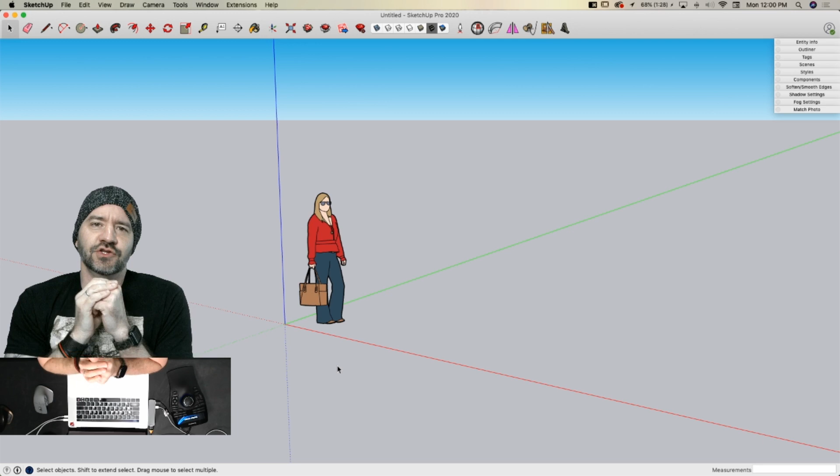Hello everybody, how are you guys doing? Whew, start of another week. Those of us who are US based found out in the last 24 hours or so that we've got at least another month of this, now through April. That was coffee, by the way. Wrong tube, nothing to be concerned about. Excuse me. More coffee ought to fix that problem.

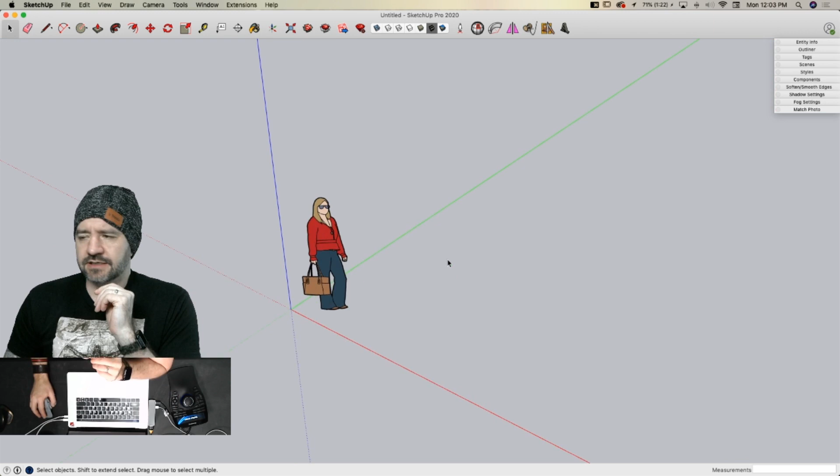All right, should probably get right to it. Yeah, lots of questions. All right, I like it. What's first? Opening with bad hair day.

Kind of. I think what we're doing is entering a bad hair month. Over the week I saw something that said there's a shortage of Flowbees, and I believe it. Not all of us can have Jody's low maintenance hairstyle. Well, actually everybody can, you just might not want it. Not everybody looks good with that hairstyle.

So I spent some time over the weekend inventorying my hat selection. We'll be cycling through a few things here, starting with a recent addition, which is this. Our Trimble beanie, that's what I got.

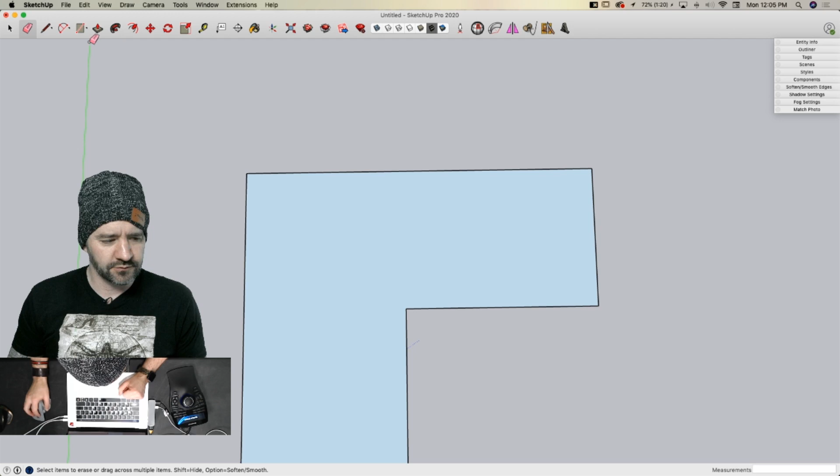What's next? Something SketchUp related, hopefully. Show me how to make radius corners again - apparently you've already shown Richard Larson on YouTube how to do this, and you made it so fast in some video that he had a hassle with it. I can't promise I'll be any slower, I'm on like my 4th cup of coffee.

There are a couple different ways to do it. This is going to be the easiest. Let me make some changes here first - I want a 9 inch radius corner. If I have a perfect 90 degree angle like this, it's pretty simple to come in and say 9 inches, enter. Then I can grab an arc and go to that 9-inch point, pull it across so it turns magenta, double click, and there we go, 90 degrees. Super easy on 90-degree angles.

But to save yourself time, one option is I could just come over here and draw my magenta without looking at the length at all. Then I can select that arc, go to Entity Info, and force the radius up to 9 inches. That's an option too, and it's easier for something like this corner down here. I'll just put that in, then select it and force it up to 9.

Much easier, and it works on inside corners too. All that's really important here is that you get that magenta - it snaps to the magenta, which is tangent to both ends. Once you place it, you can come back, select it, and change it to whatever you want. Say I want this bigger, like 12, I can do that. So that's the easiest way - get it in there first, then go back and select it.

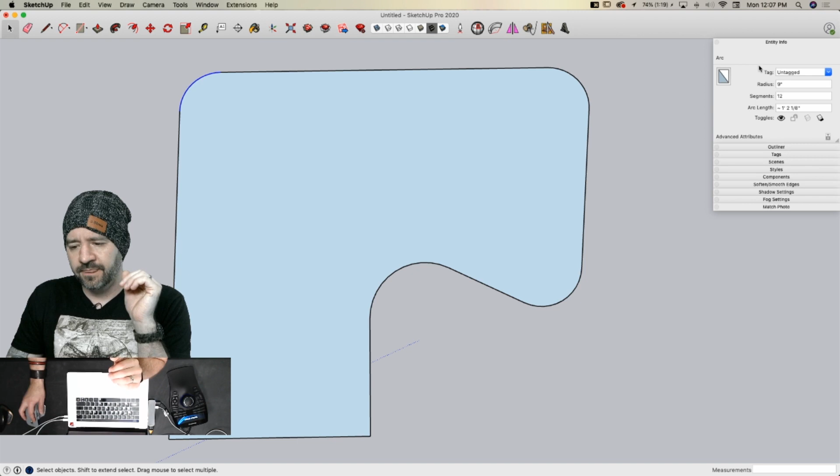Now this only works as long as this isn't broken. If anything causes this curve to explode into segments, I can no longer come in and change the radius because it's not an arc anymore. So as long as it stays one solid piece, an arc, I can come back whenever and change that radius, as long as it stays like this in 2D.

The second I do this, just to show - oh, never mind, it works perfect. Whoa, wait, I think I just learned a new hack. I didn't think that used to work. I don't know, sages, help me out - did I learn something, has something changed? I thought that couldn't happen, but look, it works perfect. That's kind of awesome actually. Whether you teach or not, I learned something new.

You guys may be seeing this in a Skill Builder in the not too distant future. Awesome. So there you go.

There's a couple questions here in the same spirit of something we couldn't get into well here. First one is how do you get a door in SketchUp - that's a 3D Warehouse question. The second is about a slow computer, wanting advice on speeding it up. Both of those - first one is search the 3D Warehouse, and the second is ask on the forum. But you can elaborate if you want. No, I think that's great.

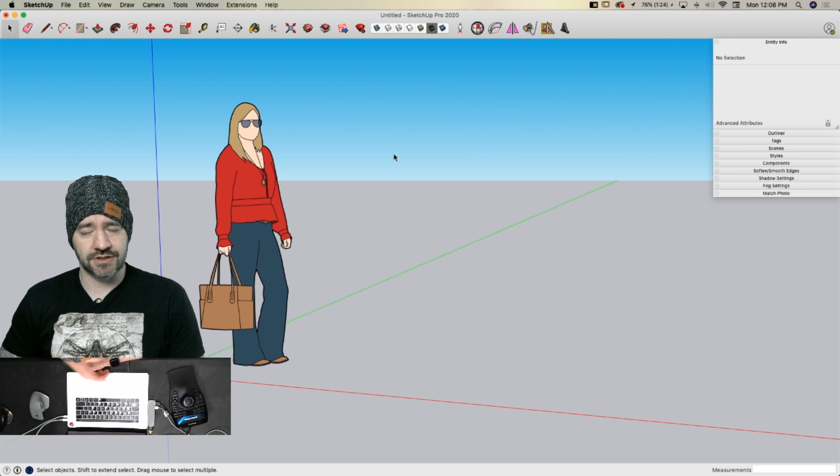For doors, I would start on the 3D warehouse, download them, modify them as you need, and then put them in. If you want to build them from scratch, go for it, save them as components. Once you put it into your model, it gets saved over here as a component, and then you can drag it in anytime in the future.

Just grab it and bring it in. But 3D warehouse is a great spot to start with for anything that's going to be a repeat use in your model. Import that as a component and use it over and over again. Just to expand upon what Jody said, the Sages on there can actually point you towards the old Sage site where they had, what was it called, like the clean modeling guidelines, or something like that. There are a lot of things to do. One is to use components. Components that are reused will eventually take up less space in your model than groups that are reused.

A big one is to come up here to your model info under statistics, and this button right here, purge unused. Every time you import a component, whether it's from the 3D warehouse or from your own computer, you bring it into your model. When you look at it, like so, if I do this, I'll go to 3D warehouse.

And I'm going to go look for a couch, and I'm going to grab this couch right here. I'm just going to download it right into my model. All right, there we go. Whoa, I don't like that couch, it's a big couch. So I get rid of that couch.

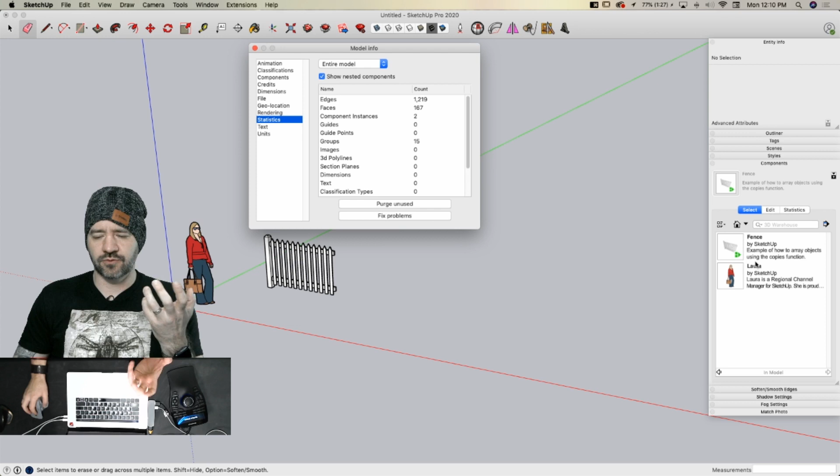And watch what happens over there with my couch. It disappears. Purge Unused gets rid of anything you've got: empty scenes, empty tags, unused styles, components that aren't used. Anything that is not currently in your model will get thrown out. So that's a big one, because a lot of people don't realize that, and they just put more and more stuff in. I've even seen people who have templates.

Nothing's on the screen, but they have like 100 components loaded because they hit Save Template after going through a bunch of stuff from the warehouse. So that's a big one, make sure you purge your model, get rid of all that extra junk.

Okay, Dennis on Facebook wants to know if there's a way to draw walls with an offset. There are several ways to draw walls, and unfortunately there's not one way to do it. It really all comes down to what you want to do. Generally speaking, if I'm going to go in and draw a house, I'm going to draw a quick outline of what the footprint of my house looks like. Say I have something like this.

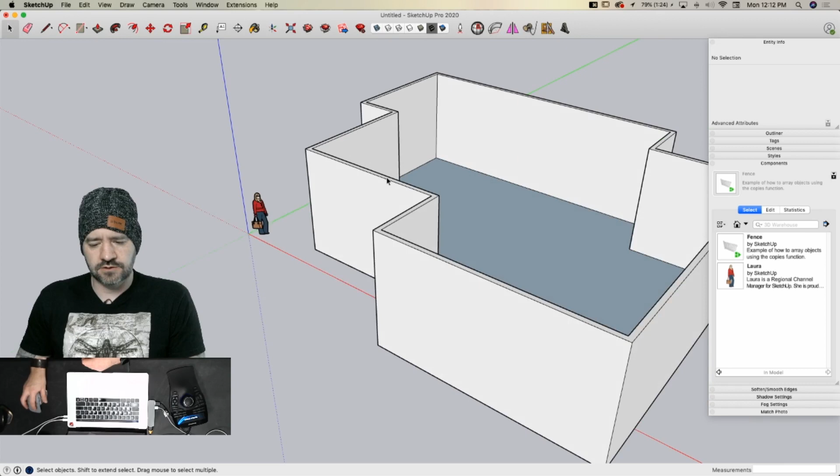All right, so that's my external dimensions. So what I would generally do is get that in first, then I would grab my lines and do an offset of 6 inches, 5.5 inches, depending if you're looking for your frame width or your finish width, whatever that is, and then pull this up in 3D space to whatever my wall height is. Then grab all of these and make those into a group, and then I'd maybe tag those with something like exterior walls.

What this is going to do is allow me to toggle on and off my exterior walls. This doesn't work if I want to get a report on each individual wall, or if I want to actually see about fabricating wall panels or something like that, because this is just going to give me all my walls in one thing. This is how I would probably go about it.

Interior walls gets to be a little bit different. So one of the things I would do with interior walls as I work through here, I would probably pull them out maybe one at a time. They would come out in smaller pieces, that kind of thing.

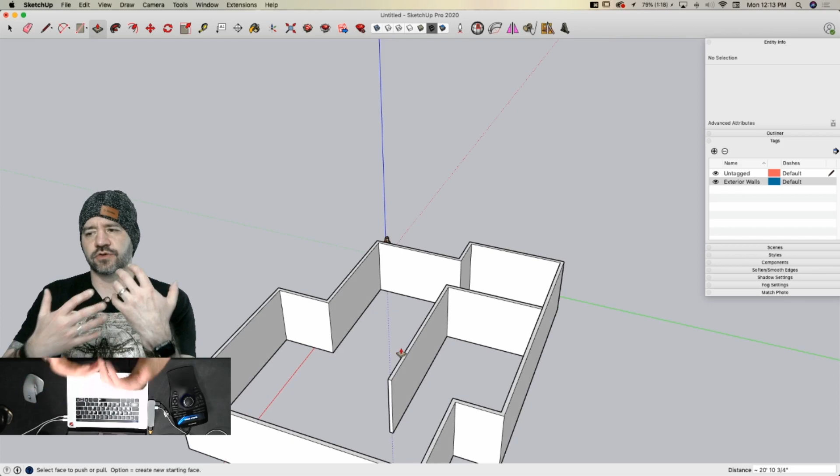I guess I'm kind of tap dancing a little bit because I'm not 100% sure what it means to build walls with an offset. I'm assuming you're talking about building both sides at the same time, and that could be done like this, like it just showed. If I come in here and break this again, I can pull this geometry. So this is one way to account for that offset, is to pull the 2D shape into 3D space. Another thing to look at is Profile Builder.

Profile Builder is an extension where you set up three-dimensional extruding components. You say here's what a profile of my wall looks like, then pull that line of wall along a reference line. You can draw it in with everything included, like a framed wall with sheathing on the outside, a plate, and a footer below, all made up of different pieces, pulled along a single line. Profile Builder 2 is worth looking at if you do a lot of wall work.

I don't know if that exactly answered your question, but I was a little confused about exactly what you were looking for. That's how I interpreted it too.

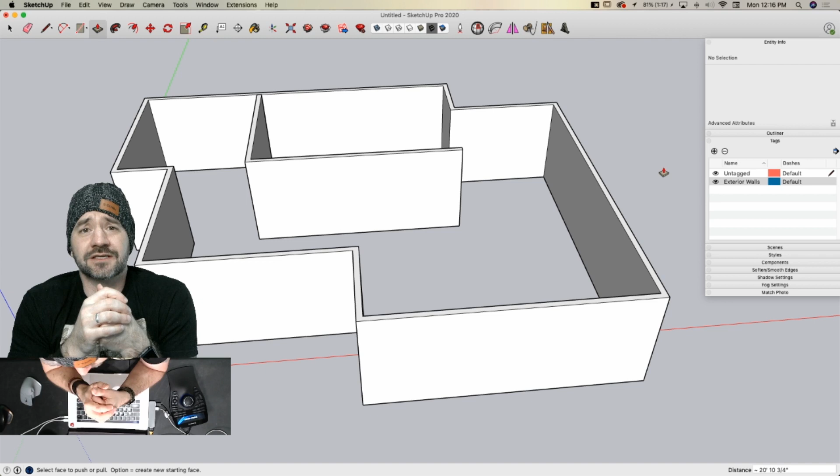So any news on Basecamp? Nothing right now, we're evaluating and trying to figure out our best plan. I want to have an answer one way or the other, but we still don't have it. If Basecamp was in June it'd be easy to make that call, but it's far enough out that we're not sure what will be happening when it comes around. We have a group at Trimble dedicated to figuring out the plan and making it happen, whether now or later. We're still moving forward as if we'll have it in September, but the final plan is still up in the air. I wish I had a better answer. Basecamp is one of my favorite things in the world, and it's a bummer not to know what's going on.

Yeah, I got to sign off now.

Dave Johnson on YouTube wanted to know about Push-Pull losing a face on the back side. He's aware of the control modifier to make a new surface, so he's wondering why sometimes Push-Pull doesn't remember a face. I don't know if I've encountered that, this is one of those things that's hard to duplicate, but I think it might work here.

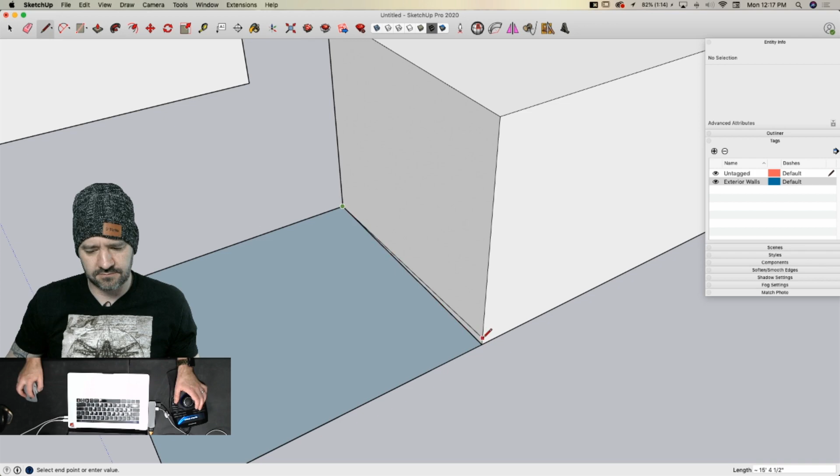If I grab this face and push-pull it up, look what happens on the back side. See that? The face it's creating is being canceled. The reason it does this as I pull this up is it assumes it's going to be joining with this shape over here. So if you have a situation like this, you're not getting a backface because it's assuming it's trying to meld with that other geometry behind. I'm guessing, there are a lot of conditions around this, but I'd guess if you look at your model when that happens, you probably have a plane that exactly coincides with the location of that missing plane.

Or now you don't have a plane. No, you do, at the start of the push-pull. Yeah, okay.

Why do I sometimes get a dashed line that won't snap to tangent?

I need more words. Let me see, do they need to be English words? Do they need to be related to this question? I just need to know what you're doing when you're experiencing that situation. This is the problem with being 10 minutes behind on the questions I'm reading. I'm gonna speed through here. How do you make an arc concave or convex segment between two circles?

Seems to me like kind of doing a radius curve you just did. Yeah, tangents. What I personally do is I end up usually finding 2 points, midpoint to midpoint like this, and then doing that, or snap to endpoints like that. So I know it's not the perfect answer, and I have a feeling if what you're getting at has to do with finding tangent, there's an extension, which I think is called Make Tangent. Dave's on, Dave might know the exact name of TIG's extension for finding tangency.

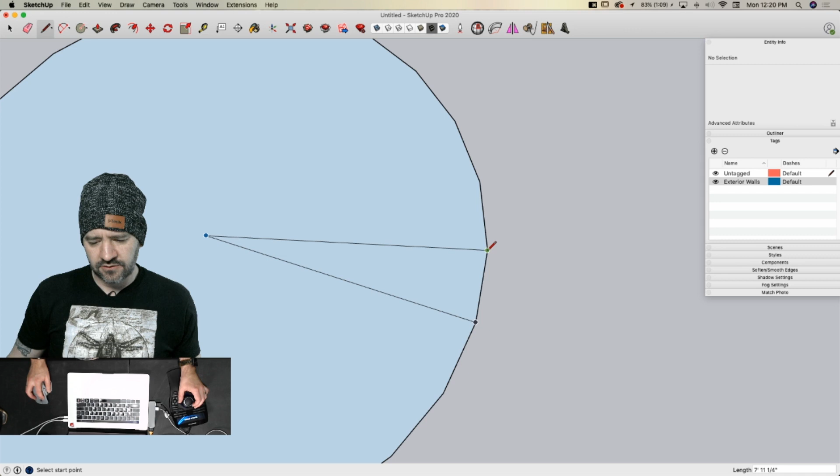When I create a circle with a certain number of sides, this is 24 sides right here. When I create that, these points on that 24 are on the actual radius length. So this length from this point to this point are the exact radius length. But as you can imagine, right here, the radius actually bulges out a little bit. So if the question is about finding tangency between points to create those arcs to make multiple circles go together...

TIG has an extension, I think it's TIG. I don't know, like I said, hopefully Dave chimes in and tells me what I'm missing. There it is, True Tangents. True Tangents from TIG will actually look at the actual location of the circle based on the radius and help you figure out where those pieces meet. So if that's where that question was going, check out the True Tangent extension.

All right, so I'm almost current, I'm only 3 minutes behind. And as I went through all those, there's a lot of questions about rendering. Recommended renderers or good renderers for Mac OS, or what is a way to make my model faster when I'm rendering? Why does SketchUp crash when I'm rendering? Do you have any wisdom you want to throw out there about rendering in general?

Rendering's hard, didn't I put that on the list with politics and religion? Well, some would argue it is a religion. Rendering's tough because first off, people have their own renderer that they like, and telling them their renderer is not the best is like telling them their kid is ugly or something like that. So it's really hard to say what is the best renderer.

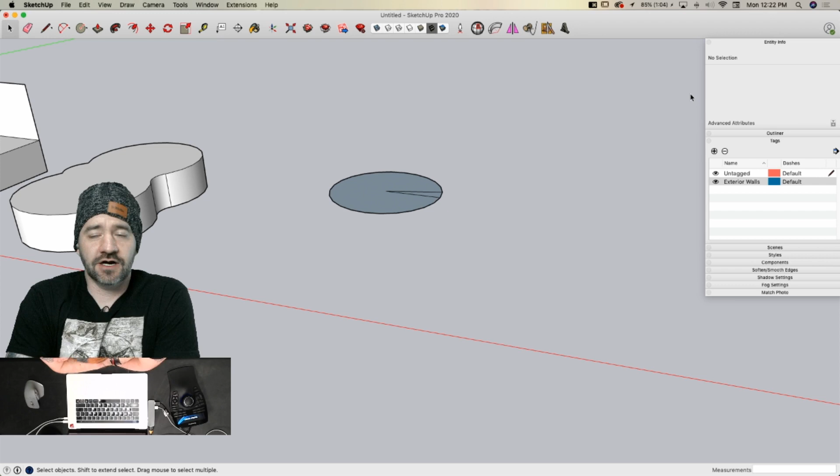So it's hard to say what is the best renderer to use. You can... that's right, that's what I said. Sorry, K. Brooks. So I would say if you know somebody who already uses a renderer and they can show you what they like about it, that's good.

Generally speaking, one of the big pieces with rendering comes down to price. There are renderers out there that you can get for a few hundred dollars. There are renderers out there you can spend thousands of dollars on. So it really depends. If you want to go top of the line, you can look at things like Lumion or V-Ray, but there's cheaper, even free renderers out there like Kerkythea that you can just get your feet wet with. And then there's a bunch of stuff in the middle.

Everybody should use Kerkythea just because then there'll be that many new pronunciations of that word. Oh my gosh, I've tried to use it too. I know there's some people on the forum, and actually some people in the chat today who actually use Kerkythea, which is an old, free renderer. I've never been able to do much with it, it's a little too much.

Sebastian is saying he's used Shader Light, Thea, V-Ray, and Twinmotion. I've not used Shader Light. I've used Thea, V-Ray, and Twinmotion, and they're all good. Is Twinmotion still free right now? That's a good question, because it was.

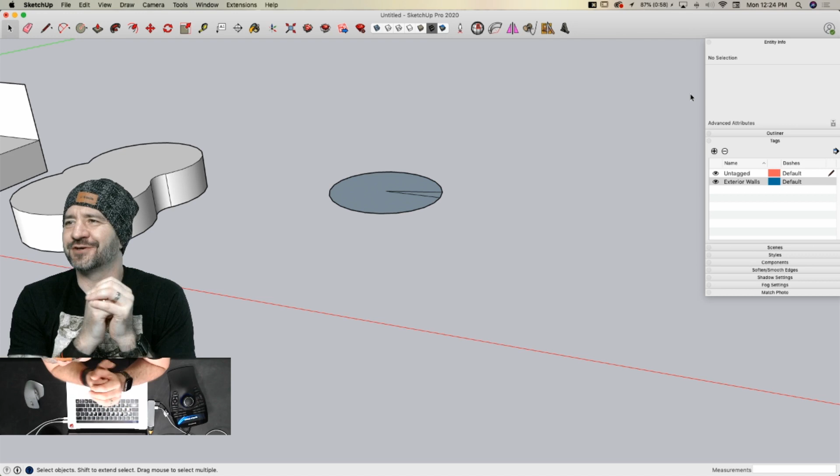So here's one that gets a little more theoretical. Why is there a back face and a front face? Why the distinction? As far as I know, front and back face just goes back forever. That's just kind of the way 3D models have been made, there's an inside and an outside of faces. I don't know how it all works, but it just kind of is the way it works.

There is a difference because a lot of it comes down to rendering too. So if I look at this shape I created earlier, these faces right here are going to be treated like actual physical faces, so the light's going to hit them, they're going to get textured, that sort of thing. These faces right here will be treated either as totally black faces that reflect no light, or possibly as see-through, where they're just not taken into account at all.

Proper faces mean they're going to actually show up correctly. Inside of SketchUp, faces have a lot to do with solids. So if I grab this and triple click and make it into a group, this is not a solid group because it's got a huge hole in it. Whereas if I come through here and get rid of these extra lines, now I have to reverse that face. Now this has become a solid group, so I can use solid tools or that sort of thing on it. It's ready for export for printing. So that's kind of the difference between an inside and outside face.

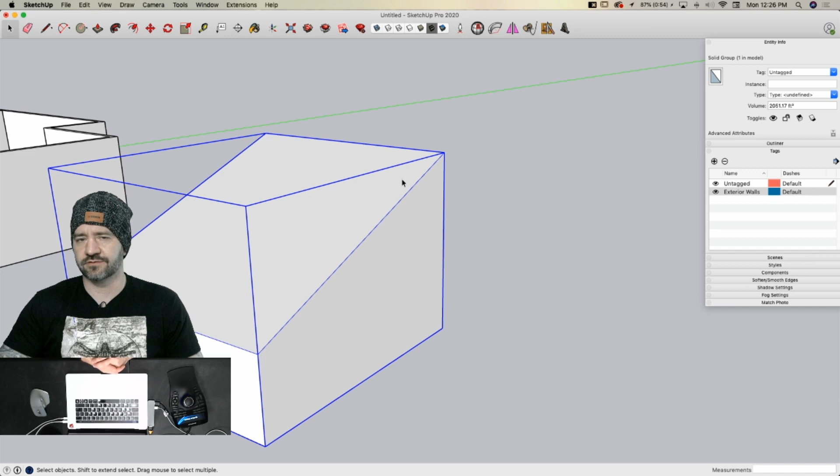As far as why, that almost feels like we're going back to the origins of 3D modeling on the computer potentially. I don't really know why there's been a difference between insides and outsides. As my dad would say, because I said so.

That's the answer, Jody's dad said so. Yeah, my dad's a big 3D modeler.

I do want to hop back real quick because somebody asked a question I wanted to touch on, and that was, why is Follow Me so sensitive? As I was going to say, there's that one, and also someone looking for Follow Me tips and tricks. So here's two Follow Me points I will make right now.

If I want this shape to follow along this line, when you first come in, everybody does this, including myself: you try to do this thing, right? And I have this really clear... whoop, it just jumped, pain in the butt, don't ever do that. What you always want to do with Follow Me is start by selecting the lines you want this shape to follow. Select the lines first, then go to Follow Me, then pick on the surface. Always pre-select, I know you don't have to, it gives you the option of dragging along. I don't know if that was just a thing that looked cool, so that's why it got put in there, but pre-select your path first, because then that jumpiness or sensitivity just goes away.

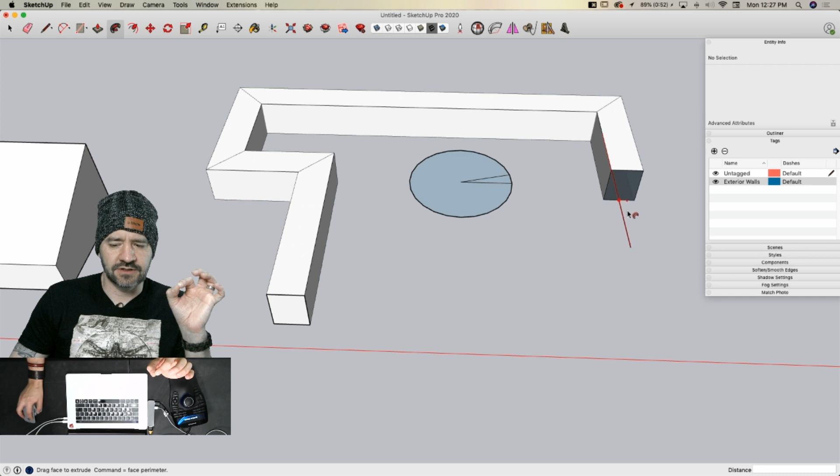As you're moving your mouse along while pulling like this, what it's doing is watching the closeness of the tip of your cursor to any existing geometry. So as I come near different geometry, it's going to start jumping around and doing weird stuff. You don't want to rely on your absolute precision and being within a pixel of the line to have it perfect. Pre-select the surfaces first, or the lines first, then choose the command, then choose the surface. The other thing, this is the biggest tip I can give, is... so I'm going to make that same shape. I want this to follow these lines.

So the first thing I'm going to do is double click this surface and make it its own group. So now it's in a group, right?

I'm not going to go back on what I said before. I'm going to start by pre-selecting my lines and click follow me. But when I come over here, I get the little anti symbol, see, no follow me here. What I can do though is, still inside of follow me, right click, edit group, still inside of follow me, click here, and now I'll go to select and exit the group. What I just created was my new follow me shape, but it's in its own group.

One of the things that can happen with follow me is once it creates all that new geometry - and this is a real simple shape, this only gave me a couple edges - but if I had a real fancy crown molding shape and it immediately joined with all my wall geometry, it can be hard to back up. So grouping it first means my baseboard or wall geometry, or whatever I used to follow around, is now its own group, and I can selectively explode that if I want to, or just keep it separate. So that's my number one tip and trick for follow me.

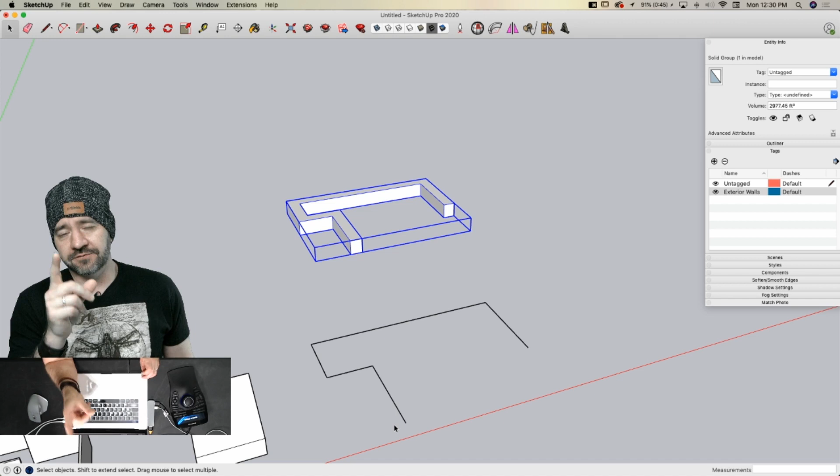Do me a favor: if you have a picture of the kind of chair you want to model, put it on the forum right now in the thread we're working in, because we are always looking for models to do on our Friday live model. So if you have good images we could model from, throw them up there, and we'll do a model on that in the next couple weeks.

If you're going to go about doing furniture, I'd take a look for different tutorials on furniture making. One of the problems people have with getting help on modeling something is they try to get real specific, like a mid-century modern wood chair. Whereas if you said something like, how do I model a wood chair, you might actually find videos of people showing how to make the different pieces.

You might reach out on the forum too. I know one of our sages on here, Dave Richards, is a woodworker, and he's modeled more than one chair in SketchUp, so he'd definitely have tips. I don't want to steal his thunder too much, but I think a lot of it would come down to modeling it in pieces as it would be created, and using components.

So that's my two-part answer: post it and ask for help on the forum. Yeah, it's definitely elaborate enough to warrant an entire 2 to 3 hour session. Yeah, and that would be great. If it has good pictures, that sounds like an awesome model to work on. I know you had two other questions already thrown out there.

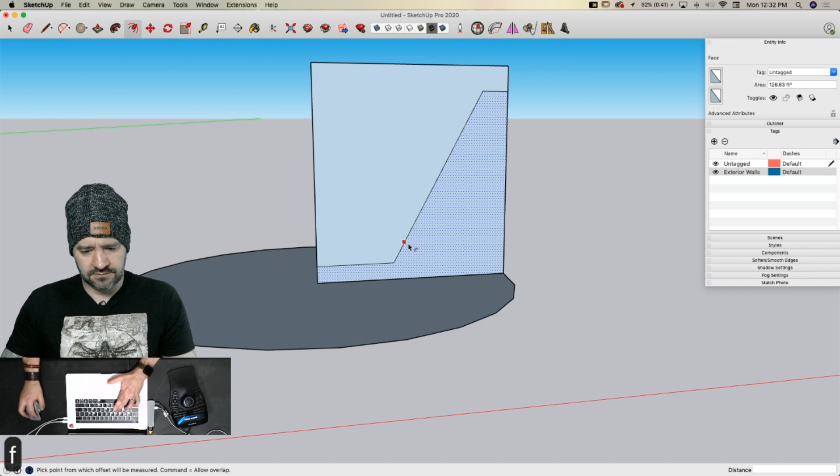Then what I'll do is draw a shape of what my teacup's going to look like here on this piece of material. I'm going to start... let's go like this. I don't want to get rid of that much stuff. Alright, so that's the start of my shape here.

I'm going to grab an arc, put a tangent arc here, tangent arc here, tangent arc here, and then maybe right here we'll do a half circle, maybe something like this - this is not going to be a pretty teacup, it might be made out of styrofoam. Alright, once I have that shape, I can just grab this line, say follow me, click this, and there we go.

This isn't exactly what I was thinking it was going to look like, but it's something. I might have to kick Titus off the channel, he's asking how to model a Mobius torus. I did a Mobius strip once, does that count?

Sure, let's see. I'm just kind of scrolling past the big 3D modeling. Well, then there's one other question, wasn't there? So the last one was making a ramp.

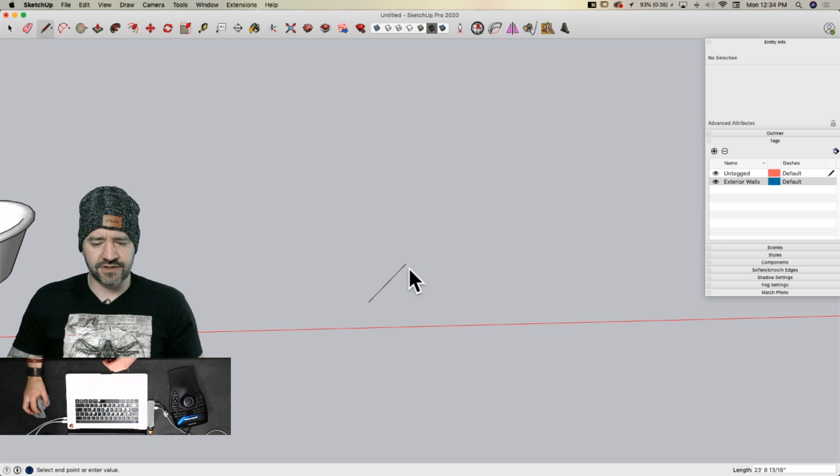So if I want to do a 1/10, I'll come over here and draw a line for 10. 10 what doesn't even matter, let's do 10 feet because it'll be easier to see. And then I'll go up, so on the blue axis, 1, and then draw a line back.

So this top line right here, that is my reference. So once I come over here and I want to draw the ramp, maybe the ramp's like 100 feet long, I can hover over this top line, and then as long as I'm parallel like that, as long as I stay in that purple, I can go 100 feet. There we go.

And that will give me that ramp at the same angle as that. So just draw over whatever your run is by your rise. When that line draws back, that's the line you want to copy or reference as you draw your sloped surface.

So I know there's other parts of that question, but that's the part that I got out of it. Yeah, that's a good part. I think there's maybe, it's also rising one corner slightly more, so the whole thing is a bit off, but I think what you just showed there probably covers a lot of that pretty well.

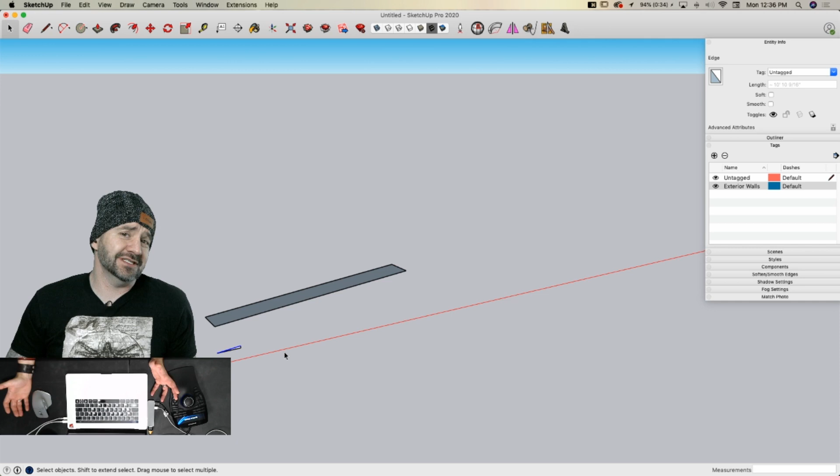So a couple people asking, or maybe the same person asking multiple times, for a Linux version. You want to talk about that? Yeah, though nobody really likes the answer to this. I know that it's something we've talked about or has been talked about. Right now, we have somewhere in the version of 30 to 40 million people using SketchUp between Mac and Windows, and we support 2 different operating systems in development for that. That's a lot of seats.

I know there's a lot of Linux users out there, but this is my personal experience, and this is actually information from when I didn't work at SketchUp, but I remember somebody ran a poll: how much would you be willing to pay for a Linux version? And I think the average came back around $20. So I don't know if that number is still true right now.

And I know our senior product manager is actually a big Linux fan. Well, I think you're omitting, because this is what his stance is on the Linux version: we have a web version largely because it now lets people on Linux be able to use SketchUp, because you can just put it in a browser and use it. That's true, and I think that's probably the extent of what we'll ever see for Linux.

Yeah, the problem is it's just such a big commitment to support an entire operating system. You know, it multiplies out all of production and testing by a whole nother factor, so it's a big deal.

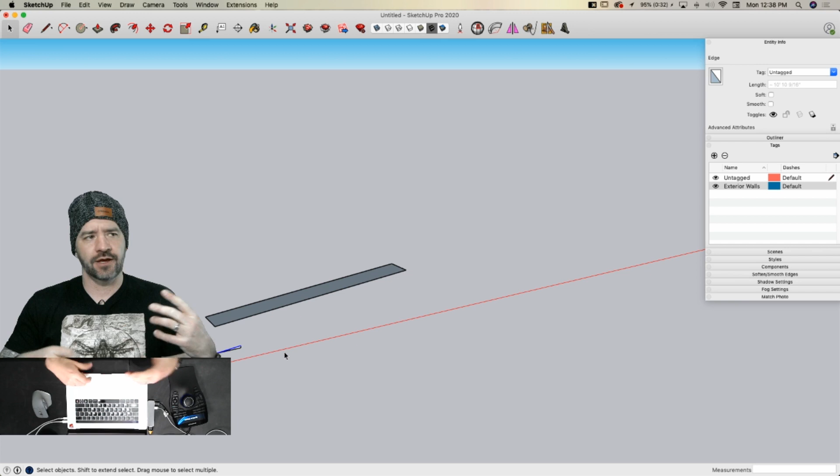So here's what we do right now. We do have a formal learning section. If you go to our website, or if you go to learn.sketchup.com, you can get to our formal tutorials. And we have something like, what is it, like over a dozen hours? Do you know how many hours total is on there, Jody? On Learn, there's 6 classes.

Yeah, I'm gonna say probably close to that. And those are all directed, like each class is an actual process from beginning to end to learn a new concept, which makes them special. Those don't come out regularly, but they're far more produced, they're very accurate, very step by step, very easy to follow. So learn.sketchup.com is one great place to do that. The other spot to get tutorials is our YouTube channel. I happen to know that we have around 850 videos available through that.

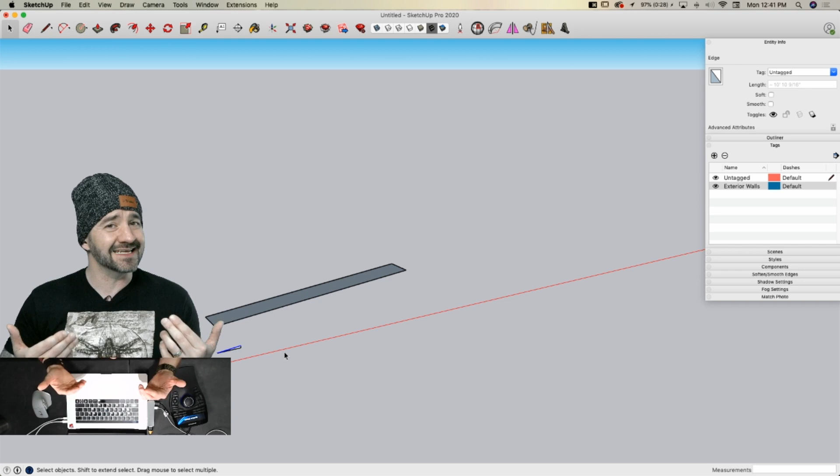We have plenty of users who use both Rhino and SketchUp. So if you need both, you need both. If you want to justify just one of them, then it's really what's going to work best for you in the workflow that you need it for. I'm an advocate for SketchUp, and I have been since before I worked here, because I like the simplicity, the usability, the learnability of SketchUp. So I will always push people to try SketchUp, push SketchUp to its limits, to do as much as you can in it. But if there's something in Rhino that you absolutely need to get your work done, then that's something else to weigh in as you try to figure out what the best software is for you and your workflow.

All right, so let's get back into SketchUp. Blake wants to know what's the best way to deal with section cuts inside of scenes, i.e. each scene has a different cut.

When you look at scenes, active section planes is part of it. So let's find a 3D thing. All right, so here we go. I'm going to put 2 section planes onto this area right here. Grab one, I'm going to put it right here. I'm going to move that in, and I'm going to save this as my first scene.

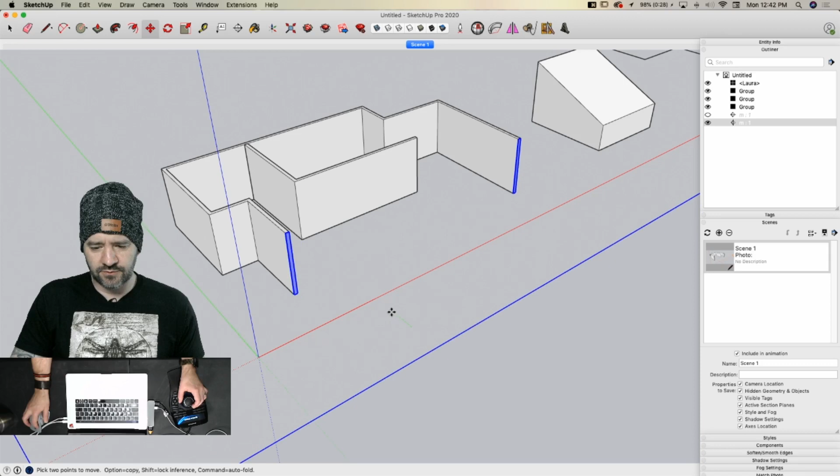All right, now I want to deactivate this section. So I'm going to go to my outliner - it's the easiest way, because I can just right click and say deactivate cut, and I will hide that. It's worth saying now that in 2020, the outliner got a lot better. Gooder.

All right, and now I'm going to grab this one, push it in, and save this as a second scene. And now, when I flip between these two, it's going to switch between the 2 different views. If that's what you're asking about, it's really pretty easy. If you've already got the scene created, you can go in and add the section cut that you want. Just make sure you right click and update your scene after you add that section cut.

Oh my gosh, I'm almost to the bottom. I'm almost to present time.

JD Cam C wants to know how to change the color of a texture in the Mac version, like if you have a white brick texture and you want to make it green. I happen to have the Mac version right here. I'm going to go grab just a stock material. Oh, hey, look, here's brick. All right, so we want to take a white brick, is that what we said? And then we want to make it something different? Yes.

All right, so what I can do is go home. Here's my material that's in this model. This is not part of the library, this is what's in the model right here.

If I double click on it, that's the process, so here's the steps. I have to walk myself through it because I always forget how to do this - not that it's difficult, I just don't do it very often. So you want to go to your home tab, don't do this from the library. I don't want to do it from in here, but from what's in my model, because I'm going to affect what's currently stored inside my model. So I'm going to double click on this, and while it's selected, it'll come up here with this edit material screen down at the bottom.

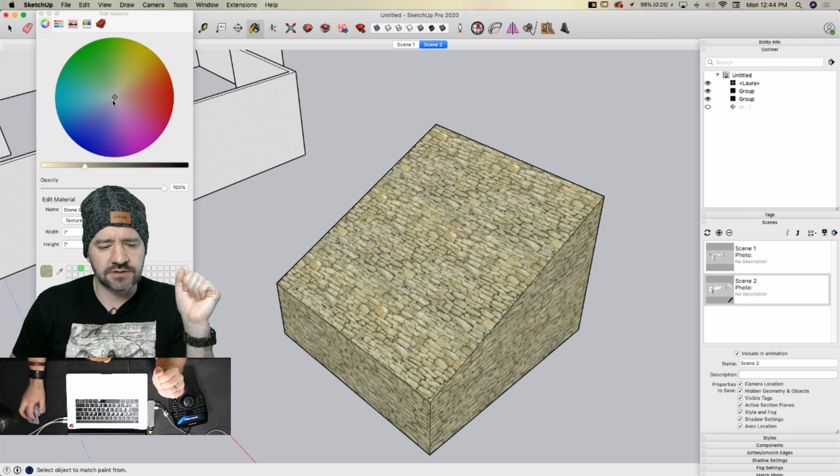Now I want to come over and switch to, in this case, my color compass. As soon as I get that up, I can just drag that however I want to change those colors. So if I want a really crazy green, I can turn that. The thing to remember is you are actually changing the colors stored in this model - so this model doesn't have the tan sandstone thing it had before, now it has crazy green instead. Really pretty simple - double click and adjust the colors, just remember you're changing that.

So the main one, if I come back over here to my bricks, this one's still the same, so I can still grab that and put it back on there. But here, saved in the model - well, now I undid all that. So just something to keep in mind.

So if you had changed the name, would it have kept that and brought the new one as new? Right, so if I come in here, duplicate this, and now I can take this one, adjust it, and now back here I have these two. So if I did want to, I'd come in here, put that on there. So now I have both. That's a good question.

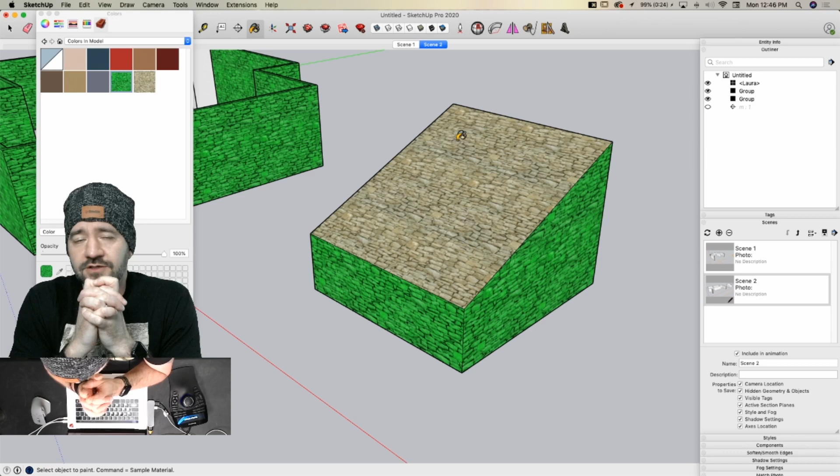Christopher Ryan reminded us of your promise of a hinge. Tomorrow, maybe? Wednesday? Nice, okay. No, tomorrow - it's a skill builder, it may be coming out tomorrow. You upload stuff on Tuesdays. Maybe people don't know that on Tuesdays and Thursdays it's pre-recorded. That's right, so we won't be live on Tuesdays and Thursdays, but there will be a SketchUp video each of those days, so come check it out. Like I said, tomorrow I think is modeling a hinge in just a few moments. I think, if you took all the talking out - some people just talk on videos - it's about a 3-minute process to make a hinge, which is pretty cool.

So someone did follow up on the ramp you were working on before - they want to make it semicircular. Actually, two people - someone else said something similar. What did they say? I lost it. Semicircular - how to create a curved ramp with a slope of 1/8. So two different people wanting to make a curved ramp. So here's what we'll do.

All right, I don't know, I'm gonna try something - hold my beer. All right, let's see how this works. And then I'm gonna pick up this line right here, put it right here. This does seem like this could be an argument for Shape Bender too.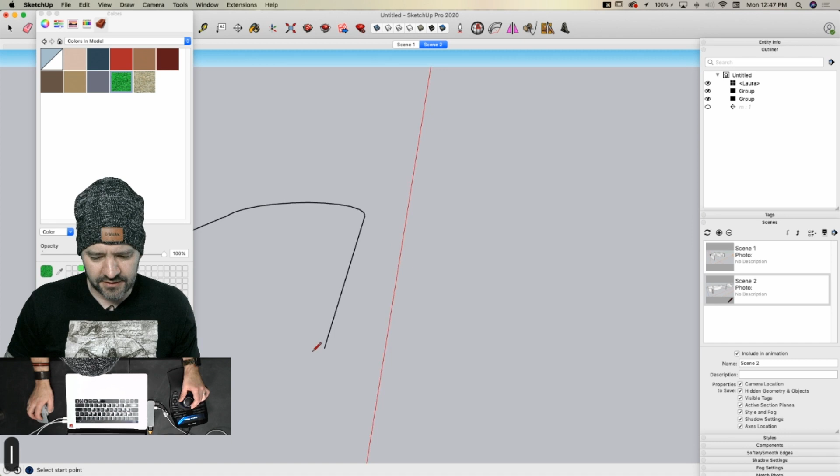There's an extension called Shape Bender available on the Extension Warehouse from a developer named Chris Fullmer that does a great job - yeah, I've heard of him - of just... and they're not simple, what they do is very complex, but very easy to use extensions. He has one called Shape Bender that lets you take one shape and basically tell it to follow a different shape, so you'd have a straight - actually I think I have it.

Maybe we'll try that after this. I'm gonna make this a group, triple click this line, I'm gonna say follow me, edit this group, click on it. So that's a 1-10 ramp. I did not angle this part, but you could have just as easily - I could have taken that arc and actually turned it up at 1-10 also. But something like that, maybe, I don't know.

Okay, I'm catching up here. How can you save components so they'll be available in a template? You mentioned that at the beginning. Sure, and same thing with materials. So, how do you create templates with it?

A template file is just a SketchUp file. There's nothing special about it. Some places have extra files that are template files versus regular working files, but template files are just SketchUp files that SketchUp opens at the beginning. Instead of having an empty screen, you have the contents of that SketchUp file.

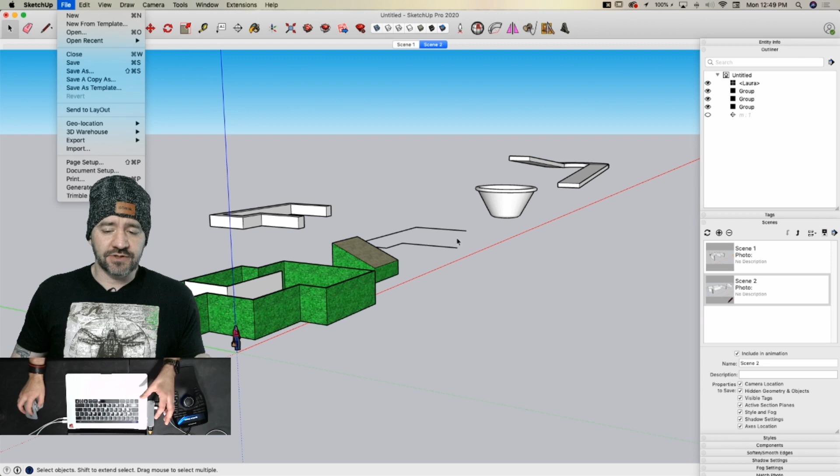You can create one at any time by just going to File, Save as Template. So right now, if I hit Save as Template and save this, when I open it up, all this stuff will be on my screen. Anything else I've set up will be in there too, so my material will be in there, any components I've created will be in there, so my fence will be right in there.

Well, let's go ahead and do it. Let's go File, Save as Template. And I'm going to call this Delete Me. That's going to be the name of my file. I don't want to make it my default template, I'm going to go ahead and save it.

Now if I go to File, New from Template, which one do I want? These are all my standard templates, but over here we have a tab called My Templates. If I click on that, here's my Delete Me template. So if I open that, brand new drawing, everything that I had before is in there. Here's my fence, here's all my stuff on my screen.

So if you think about it as just being that, a template is just a SketchUp drawing that it's going to open when you start, it's really pretty simple to figure out how to do that. So there you go, that's pretty easy.

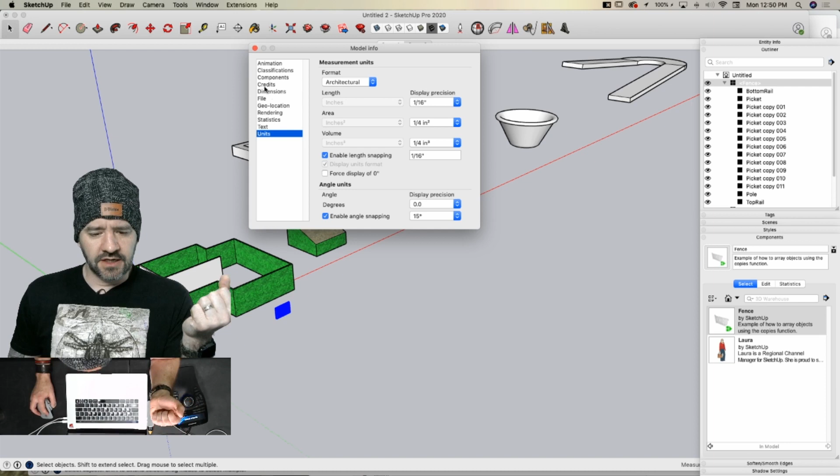It's probably worth mentioning that under the Window menu, when you go to Model Info, all of that stuff is model specific information, so any changes you make in there will also be saved. My units, any of the information that's in here is also going to be in there. So if you do a lot of models, you upload to 3D Warehouse, you come in here and fill out your credits information, that's going to be information in there also.

So yeah, all that info is automatically saved, including your style. What does my style look like? Do I want it to always show up like this when I start a new model? All part of that template SKP file. Good question.

Okay, so this one's been asked a couple of times. Can you pull a blueprint into SketchUp and then draw over the top and create a 3D model? Yes. He's asked this a couple times, and I'm not sure if he's asking if you will do that now or if it is possible to do. I don't know that I have any files that I can show to import right now.

And due to the sensitive nature of some of the stuff I work on, I am not going to root around through all my files right now, it's a good way to get in trouble. But what you can do is when you go to File, Import, which we can do.

So when I come in here, I have the ability, oh shoot, I forgot, the new version of SketchUp doesn't give you the drop down because it just opens the files. But you have the import or ability to bring in a DXF or a DWG file. If you're on Mac, you can import a PDF file. You can also import a GIF or a JPEG file, or any of those graphic file types.

And when you import them, if they're 2D, they'll just lay down on the ground inside of a group. Then it's super easy to go in and either make faces directly from that geometry or use it as a reference to trace. If you go to our YouTube channel and look for import DWG, import DXF, or import CAD, there's a series of 2 or 3 videos that Tyson made a few years back showing the process where he actually creates a floor layout from DWG drawings. So yeah, very easy, a lot of people use SketchUp in that way.

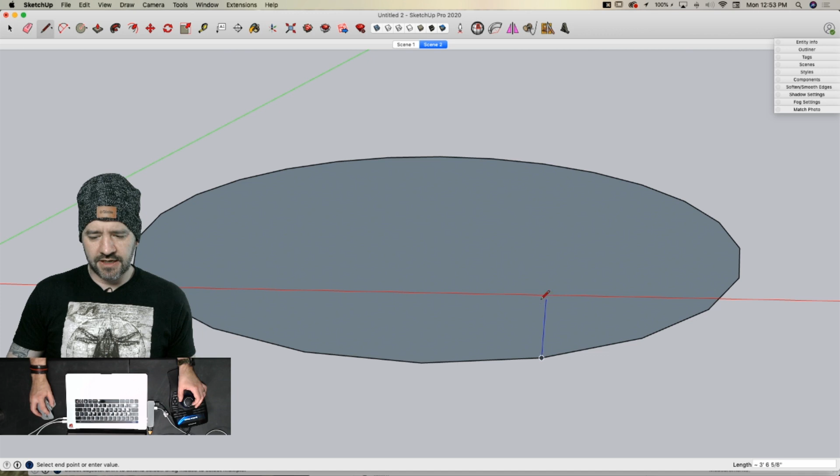So this would be my one to ten.

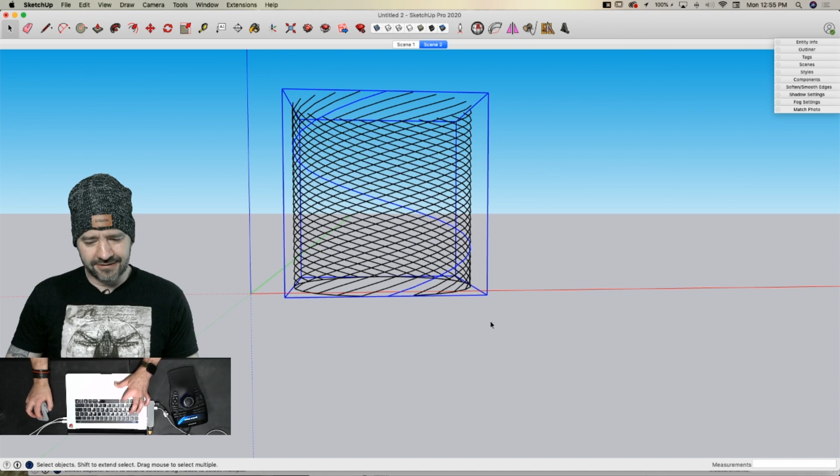Now I'm going to get rid of this circle. I'm going to triple click on one of these, and now say make that into a group. Now I'm going to grab everything - oops, control Z, sorry, make group. Now I'm going to grab everything except that group and delete it. Now I have my shape.

Now what I can do is come in here, create my ramp geometry, grab that, follow me, grab my ramp. Whoa, that's an extreme ramp. You have to really build up speed before you start going up it. All right, let's try that again.

I think this needs to be 90 degrees perpendicular to the... yeah, sorry, maybe this will work. Let's see, no, obviously I need to know - I grab that, follow me. Nah, still gonna do it. So that's exciting, what you'd want to do - I'm just excited about this shape, this is kind of cool.

I'm going to soften this. All right, it's extreme, you really have to get going - yeah, you have a lot of speed by the time you hit up here.

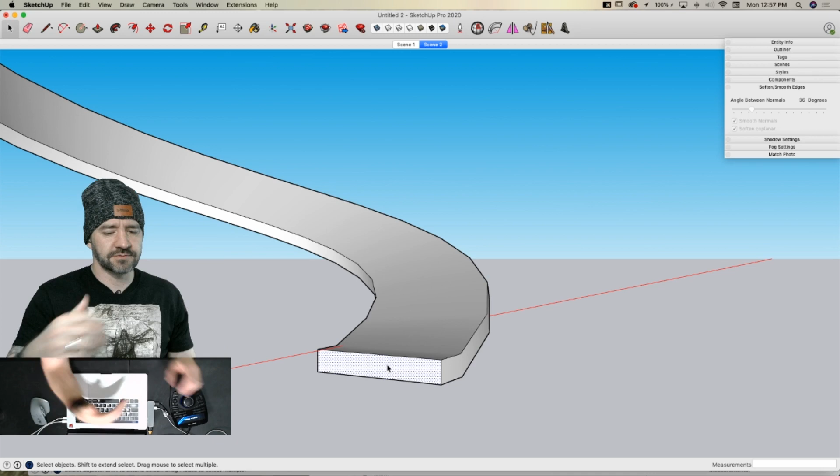There's an extension from Eneroth called Upright Extruder. What happens with the standard follow me is it keeps the geometry perpendicular to the path it's following. So if it's perfectly flat, like for most uses, it works perfectly fine, or if you're going around a circle, it works fine. But when you start to get stuff that curves like this, it starts to grab that shape, and in an effort to stay perpendicular to the path, it starts to rotate. Eneroth's Upright Extruder keeps the shape flat, vertical like that, all the way up. So that would keep it flat all the way up as it follows that arc.

So yes, I thought I could just wing it and make that work, but you will need Eneroth's extension to make that work. It's fun to watch anyway. Yeah, I like the shape I created - I'm going to keep this on the screen until something better comes along. That was a challenge.

So Caden Wilson on YouTube said when he imports AutoCAD files, it's hard to extrude them. We can talk about that, or also talk about the existing YouTube videos if you want. Yes, both.

One of the issues that comes up with grabbing AutoCAD files is a lot of times they don't create surfaces. So if I just have a series of lines, if my drawing comes in with this shape but there's not a surface there, I can't push pull that. So that means you have to come in and either draw a line to close faces and then push pull them to pull them into 3D space, or there's a couple of extensions out there that you could use.

There's actually a video within the last year or so that I made that talks exactly about this process. There's an extension, I believe - and I'll get corrected if I'm wrong - I think it's called Make Face.

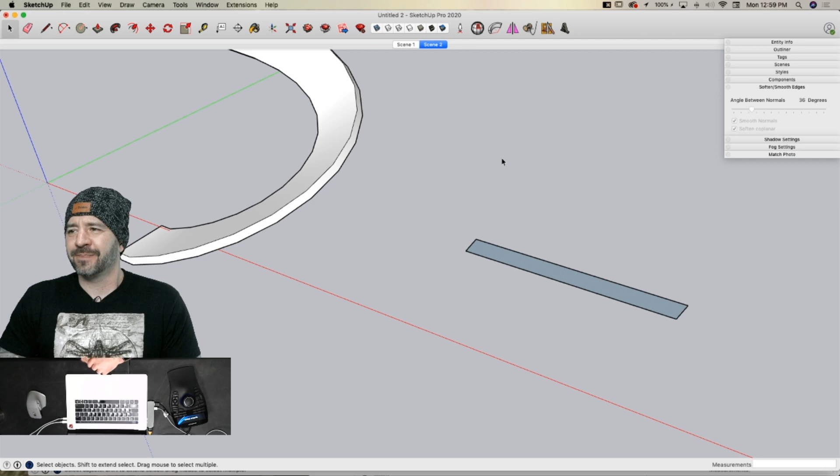I think it's called Make Face. That'll actually take those 2D drawings and run through them and try to force any place it can close to give you this kind of geometry.

One of the things when I used to do design work, if I was bringing something into SketchUp, a lot of times I wouldn't use the exact lines from a DWG drawing. I would keep them locked in a group and trace over top of them with my own lines, so I knew the geometry I was creating was correct. Obviously it's up to you, you do it the way you want. By doing that double check, I negated the issue where sometimes dimensions and drawings didn't line up perfectly, or lines weren't drawn exactly where they're supposed to be. I could do that double check with my own design work over the existing CAD drawing. But it's your call, do what you see as best.

Yep, it is the S4, it's from S4U. It's called Make Face. That's a good extension.

So Jonathan, I think Galliano is his name, wants to know if you could go over making a texture from a picture so that it looks correct. For example, how to make deck boards as a texture.

Yeah, I think Dave just said he sent me something. Oh, you're down at the bottom of the list. Oh, somebody pushed up a mid-century modern chair in the meantime. Hey, I don't see anything from Dave in that thread. Yeah, I think Dave, can you post it? Just drop it into the forum.

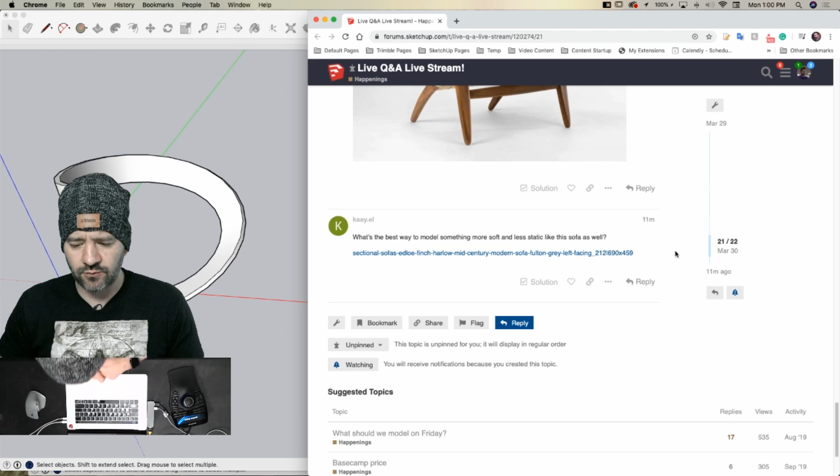Yeah, once Dave throws that wood here, I'll grab it. Well actually, you know what, here's how nutty we're gonna get. Oh it's so crazy, like Nutella.

While you're doing that, you can also answer Cowboy USA's question about using SketchUp through their NVIDIA GPU. How important is that? I'll defer to Jody on that one. Go for it. It's really important.

Well, let me just broach the issue as a whole. The issue with different video card manufacturers comes down to their support of OpenGL 3.0, which is what the newest version of SketchUp uses.

Is NVIDIA the one that does, which one's preferred, Jody? It depends on any given release. It seems like every other release of AMD or NVIDIA cards, there's some sort of wonkiness. Both of them are, for the most part, okay if you're using either. Those are really the two main 3D accelerators. The Intel cards are designed for 2D stuff. So if you have a computer with a built-in NVIDIA or AMD card, you should be making sure you're using that.

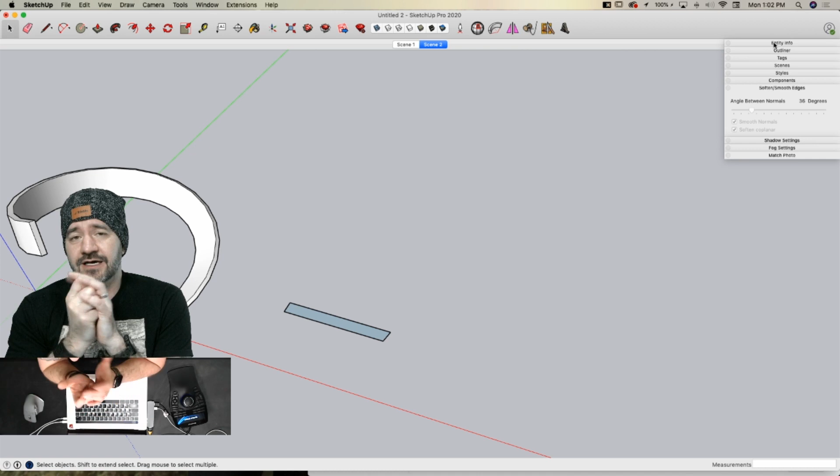The big thing, like I said, is support of OpenGL. So if you're looking at a card and you're not sure, look for OpenGL 3.0 support for the most recent version. That's 19 and 20, I believe, that use 3.0. Make sure it supports that, and the newer cards should work just fine. I've always advised if you basically go back one version, don't buy the bleeding edge thing that just came out, but get the one that came out last year, and you'll get all the benefits without paying the premium. And it's going to be compatible with the latest stuff.

All right, Dave shared one of his wood textures. So I'm going to apply this to a board. I'm going to make something that is 4 feet by 5.5 inches. That was wrong, 4 feet by 5.5, not 0.5, but 5.5. So this is my 2x6 right here, we'll go ahead and make it 1.5 tall.

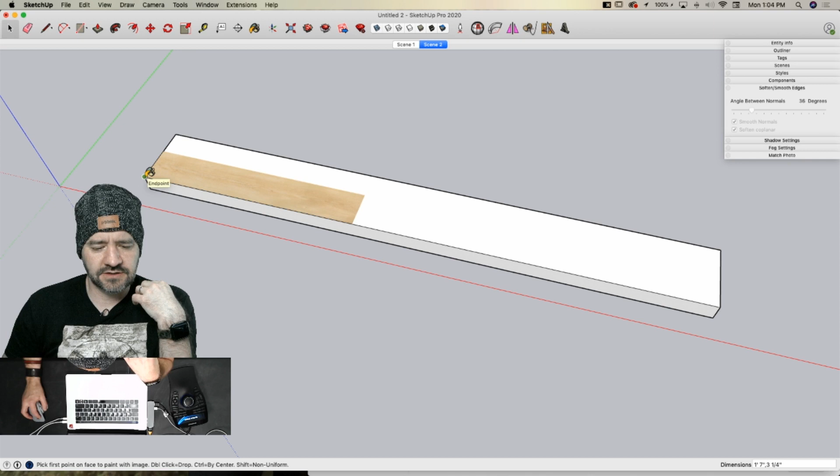So if I want to make this look like solid real wood, I could come up here, say File, Import, and grab this material. Turn my options on, and use it as a texture when I import. This is real important - one thing people trip up on is when they import it, it snaps to a corner or does weird stuff. That probably has to do with your importing usage - what is this going to be used as when you import it? It's going to be a texture, so I'll turn on use as texture, import, and now it's going to ask me to place it. I'll place it by this corner right here, and then scale it up until it hits the other edge like this.

Now, what's going to happen when it imports that? I imported it incorrectly, intentionally, because you can see here where it breaks - see that line right there? That's how long the texture was, so it got to that point, grabbed this end, and put another copy on there.

What I can do once the texture's in is right-click, texture, position. Position texture is going to bring up this big tile of the image over and over again. So in this case, I have a couple options. What I'd do is probably just grab the green handle, pull it up to the top, which scales it up - and there we go.

If I wanted to, I could come back in, go texture, position, maybe slide it back in the middle so I get all that good - ooh, look at that grain. Yeah, that's the stuff, all right, like that. And that's going to give me that stretched across all the way to the end.

The other option: if I put it back where it was, same command, select a texture - this won't work if I have more than one surface selected, only if I have one face highlighted, right click. That's the only time texture will show up. If I click position, it starts off with these colored handles - I have move, skew, distort, or rotate and scale.

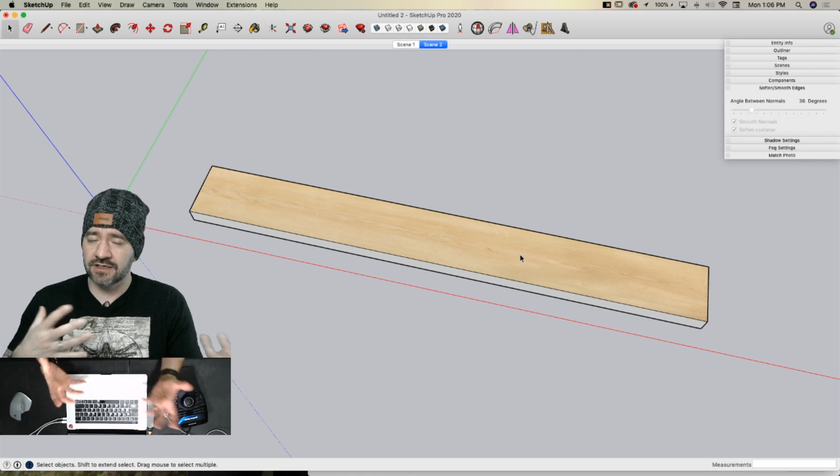Depending on what you're doing, one or the other might be preferable. Regardless of how I do that, once I get it to the right size, to save this texture so it'll be reusable, I can just right-click and say Make Unique Texture.

Let me pull this up before I do that. So right now, here's the board I have. If I click this and say Make Unique Texture, I'm going to get a new one - watch this, let me show you. That was not a very big change I made, but if I apply this here and apply this here, you can see the difference.

See, this one's repeating - they're both repeating, but this one's only repeating this far, while this one's actually long enough to cover this whole rectangle I just drew. So you can see the difference there. Once you right-click and Make Unique Texture, it's going to be added as its own texture into the model.

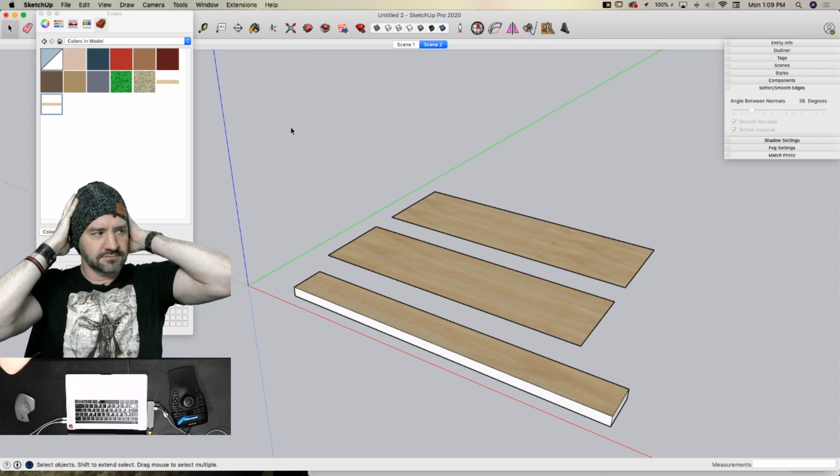Okay, is it okay to talk about zombies now? We're in the middle of a quarantine. Is that touchy? I think we've established this isn't a zombie apocalypse, this is a different kind of apocalypse. Pretty sure, because Amazon is delaying the delivery of my crossbow since it's not a necessary delivery. Oh, I thought it was just because there's currently too many of those - they're just out of stock. Everybody's ordering them, crossbows and toilet paper - survival essentials. Speaking of crossbows, which is only mentioned briefly, I did recently start watching Tiger King. Talk amongst yourselves - I watched the preview for that last night on Netflix. I don't know if anybody else has actually watched it, but I watched the commercial and trailer, and I'm just as confused as I was when just the image showed up on Netflix.

If it makes you feel any better, I made it through the whole weekend, watching it across the last 3 days and managed to finish it. You kind of feel that way through the entire series, but in a good way. I thought it was going to be really horrible, but it was actually kind of fascinating, and there's a lot of interesting people out there. That was kind of my thought - is this one of those 'it takes all kinds' kind of things? All right, maybe I'll let that one go.

No, I recommend it to everybody. Check it out, what the hell, what are you going to do with your free time anyway? Is this a share the pain kind of thing, Jody? Like everybody else should watch it because you just spent your weekend on it? Not as bad, I thought it was going to be bad, it ended up not being as bad as I thought. Which doesn't sound like high praise, but it was fun. It could have been worse.

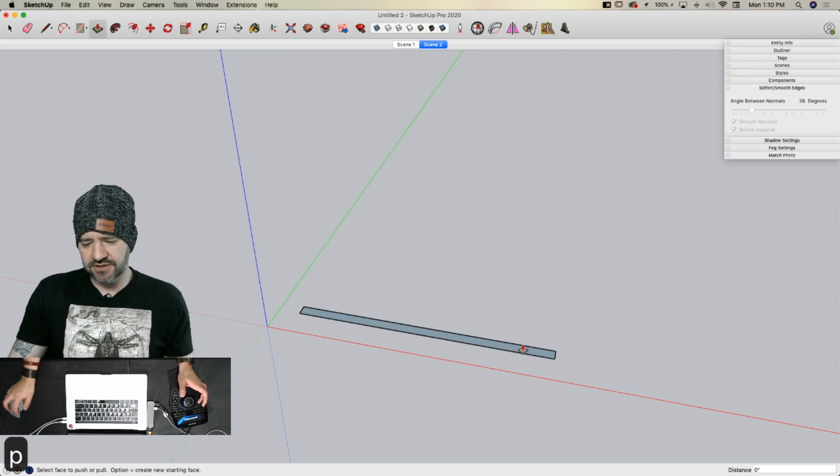So generally, if I have a door component that I want to put into a wall, this is what I do. I have my walls grouped separately from my components. So if this is a group, and then out here somewhere I make this - this is going to be super quick, but it'll be enough that you'll get the idea. If this is my door and I want it to go onto this wall, what I'll generally do is come into context here, put a hole - this is the hole for that door - and then, whoops, I didn't make that a group. And take that and put that onto the hole.

Ooh, that was a pretty good shot with that opening. Dang, nice work, me, you're a natural, you might have a fallback career. I would like to say that I had that calculated, but that was a total shot in the dark.

So what will end up happening is you'll have one group that's a wall with a hole in it, like this. And then a separate group is just your door geometry. So I don't know if that answers the question - I'm not sure what beveling had to do with it, but that's kind of where I would go.

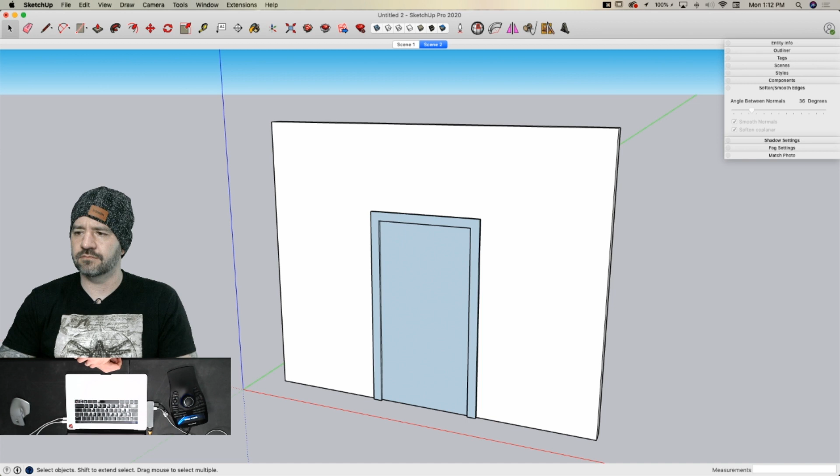Yeah, probably. Let's go see what Google has to offer. What if I say something like 'building'? What do we get? All right, so a lot here, here we go.

A lot of using photo match comes down to the image. What you want to do when you get an image is get kind of a 3/4 ideally image. If you're looking at the building straight up like this, not great. Looking at it straight on, flat at the side, is not great. Anything with huge distortion like this is going to be a little rough. What I've generally found is if I take a photo myself, get kind of close down to ground level with the camera, trying to look straight on, not tipping up, far enough back that I can just go straight at it, kind of near the corner - that's going to be pretty good. So like this kind of image right here is a decent image.

I'm going to just see how this looks. I will import this. This is obviously on the fly, but I'll go to File, Import, and this time I do want to have my options open. This is not going to be a texture, this is going to be import as a photo match. I'm going to go grab the screenshot I just took, and that's going to import that image.

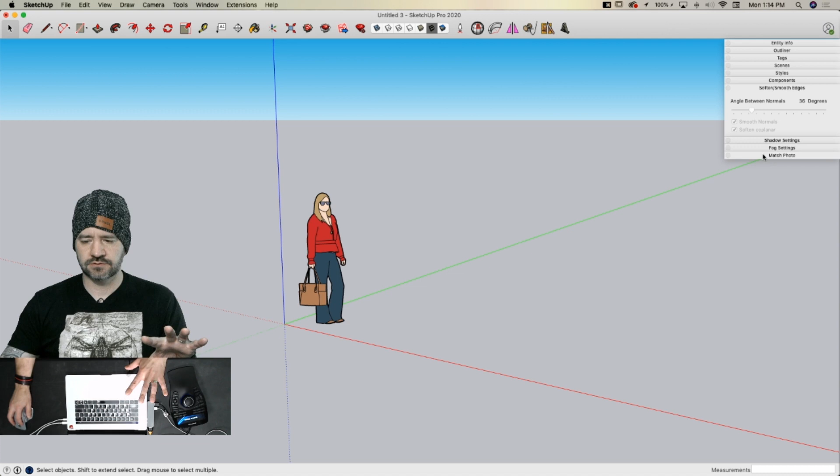Did I hit cancel? Wait, what did I do? Import, just sit here and wait. Uses texture, desktop. Here's my image. Oh, I use as texture. Dang it, use as matched photo.

Import. And then I'm going to get these handles, and these handles are the ones I'm going to pull onto the edges. This is why it's so important to have your picture taken from the right angle, because I need two good lines that create a convergence, so I want two lines on each face that go narrow off into the distance.

So I have that point, so the whole trick of this is getting these vanishing points lined up correctly. So if I go like this. I think I always heard the advice of trying to get one on the ground, or maybe it was always one on the top. Do you have a preference on that?

Not, that didn't look right. No, something's definitely askew. Let's try dropping these to the ground plane, see if that helps.

Yeah, this is why shooting from the hip on this particular example is probably not the best thing to do. Showing up with a proven... yeah, so there's some distortion, probably a wide angle lens or one of those wonky things. Yeah, that's definitely not, I got to bring it way down to make it line up.

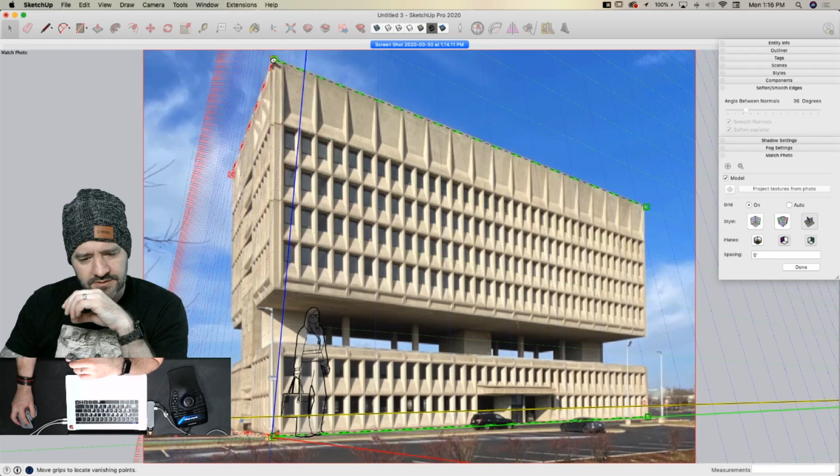So generally speaking, there's actually a skill builder about this too, about modeling from photos. You can actually tell this point looks way taller than that, even for the distance that it's at. Let me try this, I'm gonna totally wing this, but I'm gonna see. Here's what I'll do, this seems less distorted down here.

Open Google, find the most distorted image you can, import. What could go wrong? And then just talk through the whole process. The nice thing is that even though it looks less distorted, it's actually just as distorted everywhere. That is definitely something odd.

Great example, Aaron, this is great. Thanks a lot. Yeah.

Let's see what happens. Well, check out the skill builder. Watch the skill builder, it's a great example. I actually prepped images. Yeah, that's the tricky part with this one. Yeah, so this is obviously a lot of distortion, so that's not going to work.

All right, so done. Barry asked a while ago if there's a way to only make a change to one scene rather than having to go back and update every scene, if you have a lot of scenes.

It depends on what you're doing. If you add something new to the model, then it's going to show up in every scene. So here I have 2 scenes. If I put something new into this, let's say I grab this, make it a group, put it on its new layer called Hide Me, and then I go to my tag and say, hide that over here. When I update this, it's not going to show up here, but as soon as I jump over here, it's going to come back.

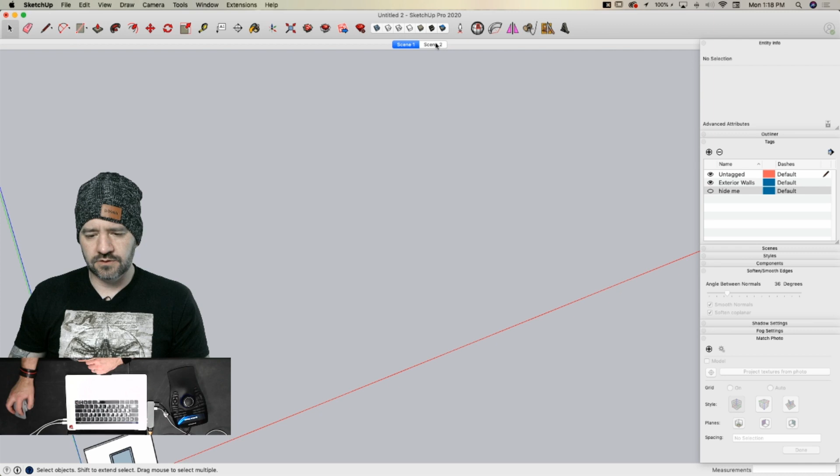So if I do something like that, then I will have to go through each scene and update that. Ideally, in the ideal workflow, scenes are one of those things left right at the very end. You go through and you create your scenes, so that can be kind of frustrating to do.

There's a couple extensions out there. I haven't used them very much, so I don't even know the names of them, but there are some extensions out there that make that easier. Somebody might be able to mention those that make it easier.

One of the things you can do, and I'd urge you to try this in a sandbox model, don't do this in a production model, but it is possible to update multiple scenes. I said tags, but I was looking at scenes—that's right, you can update multiple scenes. So I can select both of these, and if I hit update right now, it'll update both of them, making both scenes exactly the same.

Let's go through in here. I'm going to do this. I'm going to go to scene 1, I'm going to update that. Scene 2, I'm going to come around like this.

Now as I switch between these two scenes, this is looking from one side with that box turned off, and this is looking from the opposite side with the box turned on. If I wanted to update something, say like this visibility turned off, what I could do is select both scenes and say only visible tags, update. So that's only going to update those tag visibilities. But the problem is, no, that's going to mess with my whole scene overall.

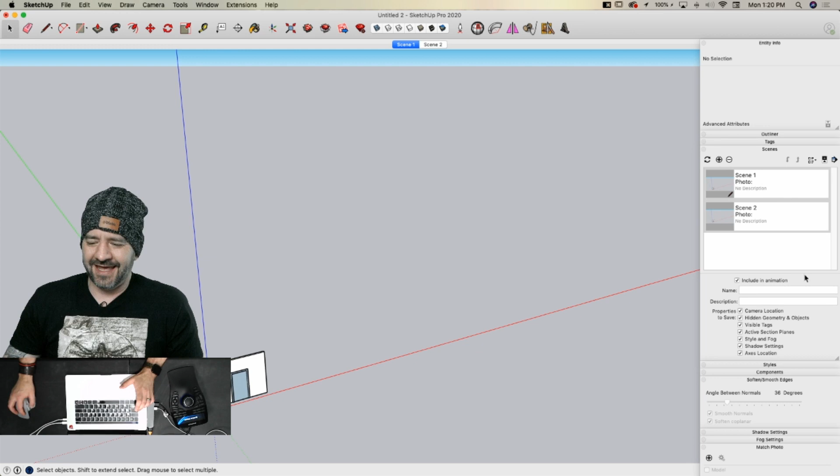All right, let me walk through that again. You guys got to see me think out loud there. What you can do is select multiple scenes, and when you hit update, tell it to only update certain items. So if it's something like that, something new added that you go in and turn off, you can update that on all scenes using the update only visible tags flag, and that will only update that. But like I said, just like I did, I just kind of ruined my scenes by playing around with that. Make sure you get that down in a sandbox before you go in and try to do it on your production drawing and potentially squash your scenes.

Or there's always revert. I don't know if you guys know about this command, but under file there's this revert command, which takes you back to the last saved version. It's actually a really nice command that people don't talk about enough, if you're prone to screwing your model up. I don't know about that. But then, yeah, I never screw up my model.

That's a lie. Christopher Moore asked a little while ago if you could explain the difference between rotate and protractor.

And I'm going to throw in versus using the little grabbies on a component. That's rotate. See that? I'll do it again. Protractor is going to give you lines at specific angles.

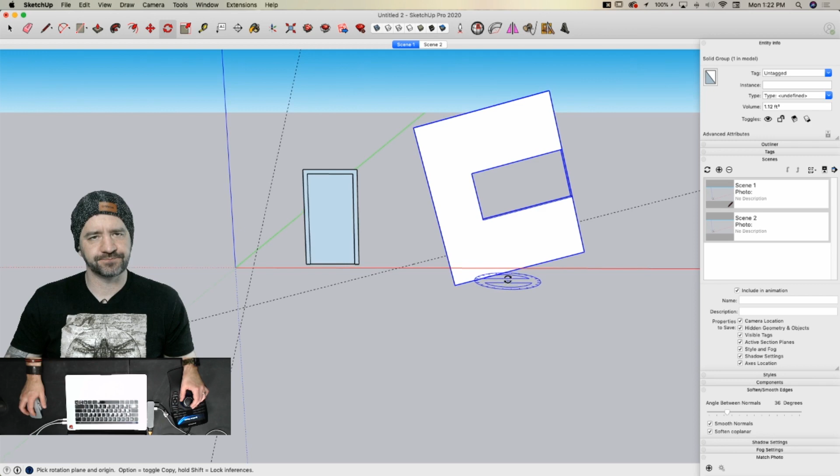Whereas rotate, let me actually take geometry and move it. And to throw in Jody's thing, if I go to move and I use these handles to rotate, those handles, I love these. I mean, I think I said this on our last live model, I love these handles. They're great because what they always do is they always rotate around the middle of a group or component. So I don't have to pick the point that I want to rotate from. If I'm just doing regular rotate, I got to come in here, hover on a surface, pick a point to use, pick the point I'm going to start from, and then the point I'm going to end at.

With the move handle, if I'm in move, it's just pick a point and start spinning it. I think those are great, and as a lot of the stuff I do ends up being in some kind of a rectangular shape, that makes it real easy to do. So, good question.

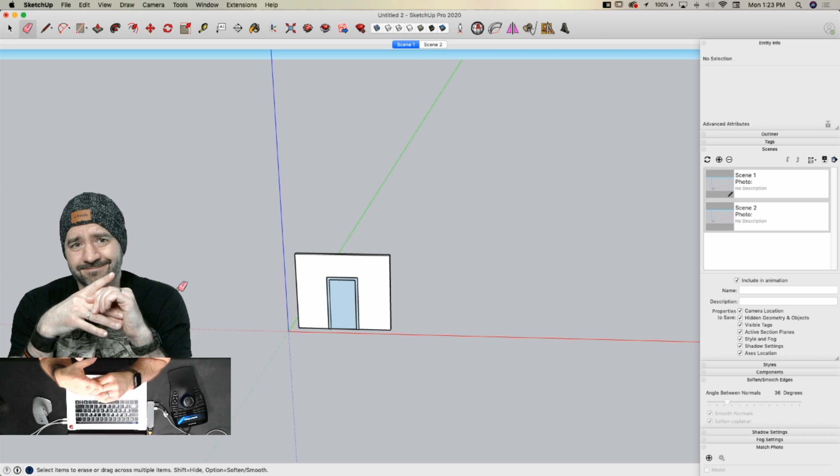So someone has asked a couple of times now about modeling a mannequin. They've looked on the warehouse, couldn't really find anything. Not sure there's a good answer, but I'll say it's at least talk. Anything's possible, but going back to the ideal software for the purpose, if your goal is to create human shapes, maybe that's not the ideal solution. That's where I would lean on the warehouse. There's definitely other software that makes it quicker and easier to make human forms.

We've done some stuff with subdivision. I think I did a hand on there once, human faces, that kind of thing. Depending on the fidelity you want in your human analog model - that was a smart guy sentence I just said - to say, depending on how detailed you want your mannequin to be, that might be a rough one. You might spend a lot of time fine-tuning that.

So it's possible, it would not be a quick and easy thing. It's certainly not a beginner model to work on. But I'll never say you can't make something in SketchUp, so it's probably the best answer, but it's not always easy. Yeah, humans are funny shapes.

So a while ago, when you were working on that door component, cutting a hole in the wall, he's come back with some - I scroll past him now. The question was if it was possible to create a component that will cut through both walls. Oh no, a component will only go through one surface, so one face.

So if I make a cutting component, when I make this, if I call this a component, I have this option of cut opening, but that's only going to cut through a single surface. It won't go through both.

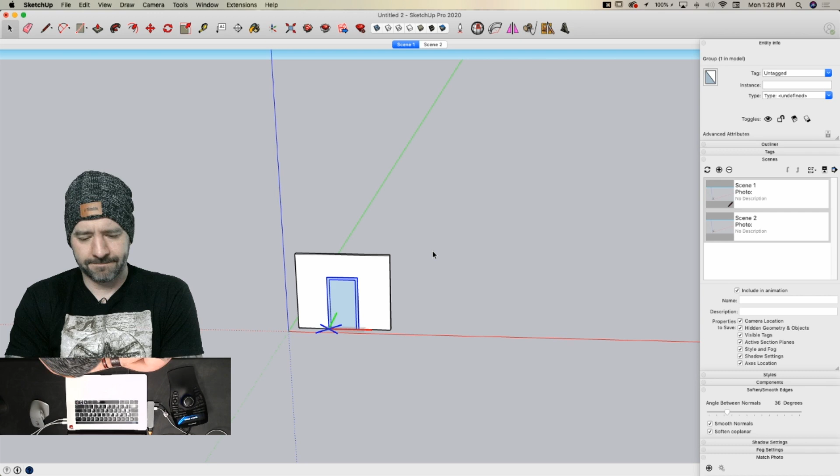So it was asked and then seconded if you could talk about insertion points inside of components, or reassigning axes. I'm sorry, yes, all right. So let's make a thing like this. I'm gonna take this, and before I make it a group, I'm gonna rotate it like that, and I'm gonna say make a group. All right, so actually, we'll make it a component that way.

Okay, so once I've created this, if I double click, it shows me the local axes. These are the axes inside this layer of the component. Each time I create a new geometry and go in the layer deeper, I can reassign new axes. So this, we're just gonna keep it simple, one layer out.

So if I look at this, and if I wanted to come in and start modifying this, right, so I'm gonna come in and start drawing geometry or something like that. It's gonna click to the axes here. So that means if I wanted to draw a line parallel to this face right here, I could do it, but I'd have to use inferencing based on faces instead of just clicking to the red and green axes.

So possible, not ideal. So what I can do is come in with my axes tool, just a native command, click on the axes tool, pick a point that I want to use as my origin point, and then assign the red axes and the green axes, and that'll move. So right now, I'm just using it temporarily. If I come in here and want to draw another box, now I'm just using the red-green axes and push along the blue axes. Pretty simple. It hasn't assigned that as the origin of the component yet.

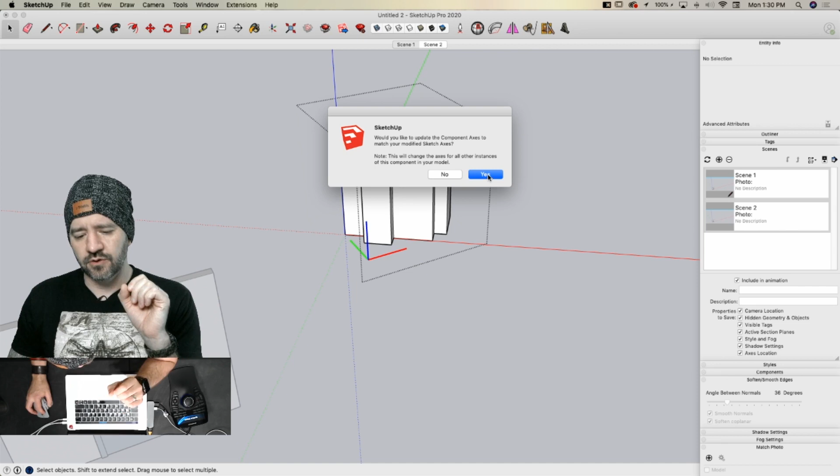As soon as I click to leave, it's going to ask if I'd like to update that. If I hit no, it'll go back to this axis. If I hit yes, it'll take this new point I created and make that the local origin of the component. You can tell the difference because when I click on it, the bounding box turns too.

This is especially important if I come over to my components window and grab my box and bring it in. Look at what point I'm grabbing that box by—it's that same point I used for my origin with the axes. You'll also notice this is rotated to the world axes based on the axes here, so it took it aligned inside here.

This was my red axes—it aligned that red axis to the world red axes. Here's my green axes—it aligned that green axis to the world axes. So it's important not just what point it's going to place it by, but how it's going to orient that.

A lot of people don't think about using it, but the axes tool is real nice if you're working inside components ever.

So Quick Tech, I think just showed up, but he's asked a couple of times, so he's really excited to hear. He said he's having problems cutting components, wants to know if we can talk about it. I don't know if he means cutting holes with components—I presume that's what he means.

Let's assume so. All right, I'm going to take this and explode it. Or she—apologize, that is true. Don't judge, don't assume.

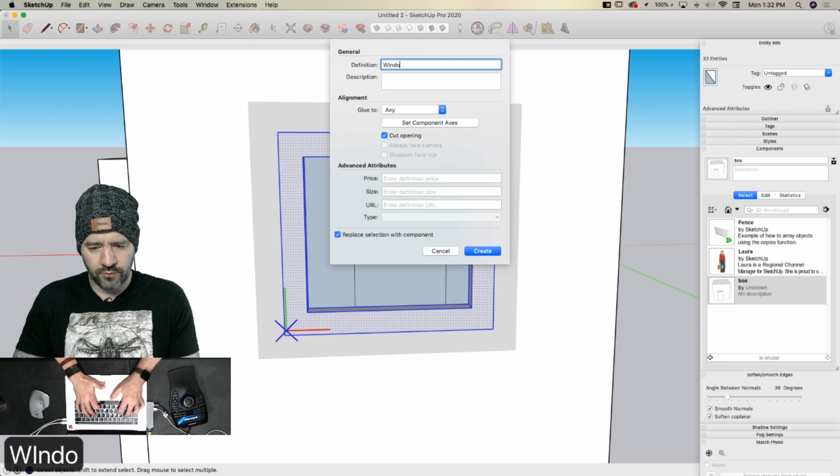All right, so if I wanted to create—I'm going to make something like this. Here, let's go like that, and I'll do that. I'm going to take this right here, just this geometry, and say make component, and it's a cutting component. I'm going to call it a window, and create it.

All right, so now if I grab that window and slap it onto a vertical surface, it's going to cut a hole there. If I set it to glue to any, I can put it on any surface and it will cut a hole there. Now, if I grab that same window and drop it on here, no cutting.

Why is that? Because this is not raw geometry. That cut is only going to show up if it can get to that geometry and cut a hole through it. So I don't know if that's your problem—I'm sorry, that sounded rude, not that you have a problem. I don't know if that's the issue you're experiencing.

But the two biggest issues I see: people grouping their walls and they won't cut. The other thing is, if you look at my origin, the origin is flat against the wall I want to cut. The blue axis is coming straight out from that face—that's this blue line right here. See this laser shooting at me in the face? That's coming off of the cutting surface.

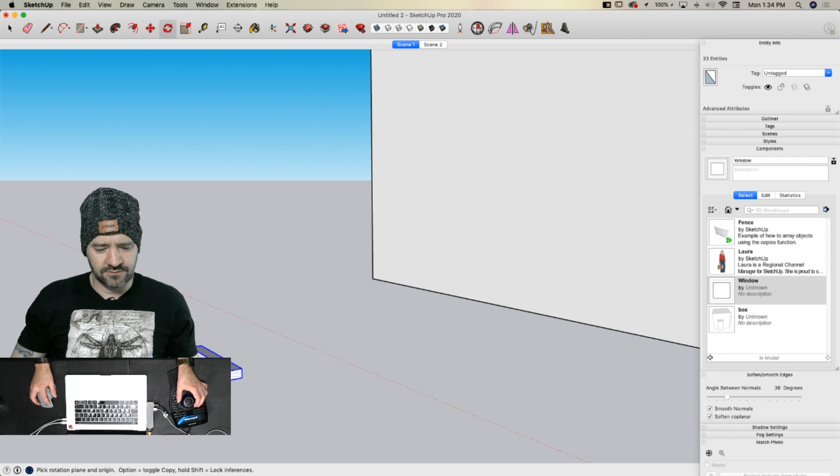So if you do something like—here's what I'm going to do. I'm going to grab all the geometry out of this, copy it, come out of context. I need some more walls to work with, so I'm going to come over here. I'm going to paste—I guess I could have just redrawn this, it probably would have been just about as fast—but we'll take that and put it on the wall.

Is it grouped? Not sure why that's not cutting. There we go, okay, there we go. Okay, so now if I grab that again—sorry, I'm not really sure what happened.

When I say make component, this is the part I ran into over and over again. When you do this and come in here to assign your axes, see this gray plane right here? That is the plane it's going to glue this surface to—it's going to take that door or window and put it on like that.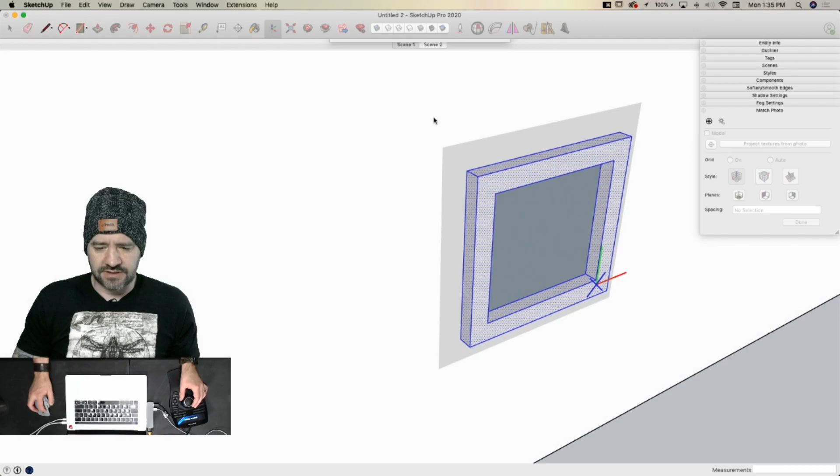If I come in and reassign my axes, for example, and say something like this is my red axis—go to a different point, go this way, and then—actually I can't change that. That actually works out really well. Never mind. Whoops.

All right, so if I come in here and start playing with this, this is where I tend to end up screwing stuff up. I'm really trying to make a mess of this and it's not working. I'm really having no problems. You're just too good at it.

I hate that. Yeah, one of the first things I ever learned was you just create it on a surface, create it on an example surface of where you're going to want it to cut later. That's probably the main thing that's always made it work well for me. I think sometimes people try and make it just on the ground plane.

It's really important to make sure you have Glue to turned on, because otherwise cut opening isn't available. If you're having trouble getting this checkbox to show up, it's because it's set to none, and then it grays out. So make sure you have Glue to set to any, cut opening turned on, and when you apply it, make sure you actually put it onto raw geometry, because it's not going to cut a group.

All right, sorry, I'm scrolling back up here trying to look. Brian suggested you're not being rude, you're being sassy. I think he's probably right. Just keep me locked up in my house for another couple of weeks and we'll see how rude things get.

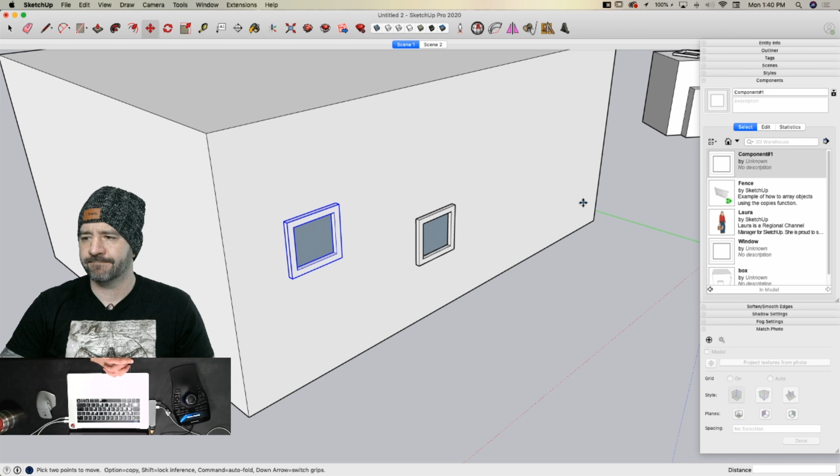This was asked earlier and then it got repeated, and I apologize that I didn't mention it. Amari was wanting to automatically save to earlier versions, because they have programs that need their model to be in an older version. Yeah, unfortunately, I think the only way to do it is file save as.

Jonathan also wanted to know if we're going to keep doing it after the apocalypse. Yeah, well, we'll just be modeling memories then instead of real things.

When did you start doing them? When was the first one? The first live model was about a year and a half ago. We started doing the Millennium Falcon from movie images, trying to reproduce the Millennium Falcon prop. I think we limited ourselves — I don't know if you guys remember how long we did it for. We tried to limit it to a certain amount of time, so we did a part 1, part 2, part 3, and everybody was like, I'm sick of this, let's do something different. So now we try to make all of our models fit in the period we have available. Usually 3 hours is about as long as we go anymore.

Lucas asked a question about what's the best extension to make curved surfaces with. If you go look at... he had a follow-up about it working on Make, so make sure you mention that. Oh okay, yeah, so I will negate my answer as soon as I'm done.

If you go to our YouTube channel, we had a video posted maybe 2 weeks ago about an extension called Shape Bender. In that video, I talked about 3 different bending extensions and what each of them are good for, so it would be worth checking that out. It was a good video because it talked about True Bend, Shape Bender, and Flowify. They're 3 different bending tools, and they all work a little bit differently and do stuff differently, so those would be worth checking out for sure.

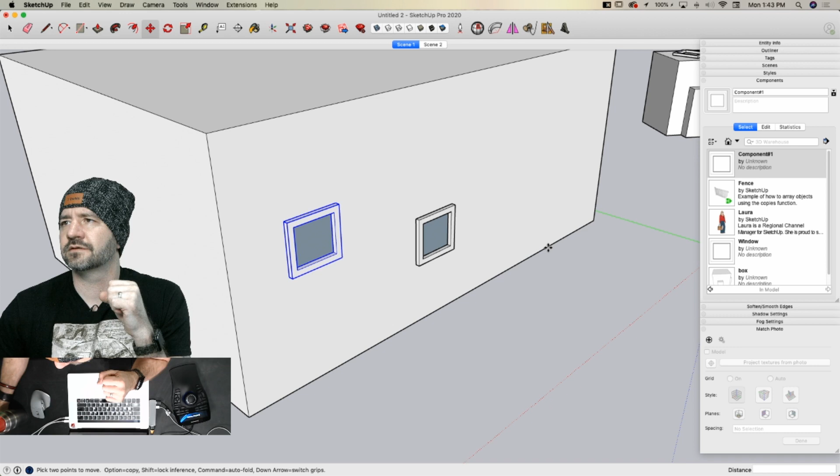But there's one above about shadows. How can I avoid the shadow from normalizing the texture of the materials to simple colors? That sounds like it might be a video card issue. There's nothing that should cause your textures to break when you get a shadow on it. One issue might be the ground plane — you might be seeing ground plane shadows because those are just gray over top. If you look at your shadow options, if shadows are turned on...

This shadow on ground option — I usually have it turned off. Let me just do this, it can do some weird things like this. Is this what you're seeing, where these shadows are like covering up surfaces? That's a ground plane shadow. The rest of the shadows — let me grab this, let me make some shadows.

The rest of the shadows shouldn't turn textures into anything. So if I put my green material here, it should only darken it like that — I shouldn't see a difference in the actual materials. If it's not doing this, I'm guessing it's a graphics card issue, but that's just a guess. If you have specific examples of what you're seeing, you can take some screenshots, share them up on the forum, and then we can troubleshoot it a little bit better.

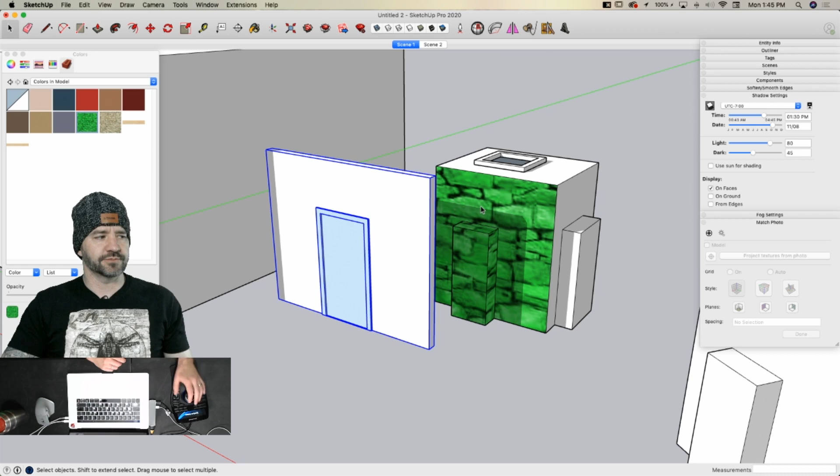Yes, this is a 3Dconnexion SpaceMouse Enterprise. I use it for presenting in SketchUp because it's so smooth.

Olivar also asked if you had a mouse recommendation related to the 3D mouse. Absolutely, I always recommend Logitech mice — they just have a wide variety, there's so many you can get. Whatever mouse you get, make sure it has that third button, the little scroll wheel. Absolutely essential for SketchUp — that does all your zooming, so as you roll it up and down, you can zoom in and out like you're seeing there.

If you hold down the middle button, it takes you into orbit. It's a great tool, it simplifies all your 3D moving. The 3D mouse takes that portion of the 3D movement off of this mouse and puts it over in your left hand. This is nice because it means I can do other things while I'm rotating, I can jump from one command to another as I'm working. It's smoother, it looks nice. Not a requirement, you don't have to have a 3D mouse to use SketchUp, but it's a nice option to add to what you already have.

As far as my recommendation, if you use your computer all day, I can't recommend anything except for the MX Master. It's been my favorite mouse I've ever owned, this is actually my third one. I have another one connected to my streaming computer, that's my old mouse, it's Bluetooth, and that's the only Bluetooth mouse I've used that actually felt right in my hand. It's great, it's programmable, it has 7 different buttons on it, so a lot of shortcut keys. I'm passionate about that because I think about how much time I spend with my hand on this compared to pretty much anything else I have.

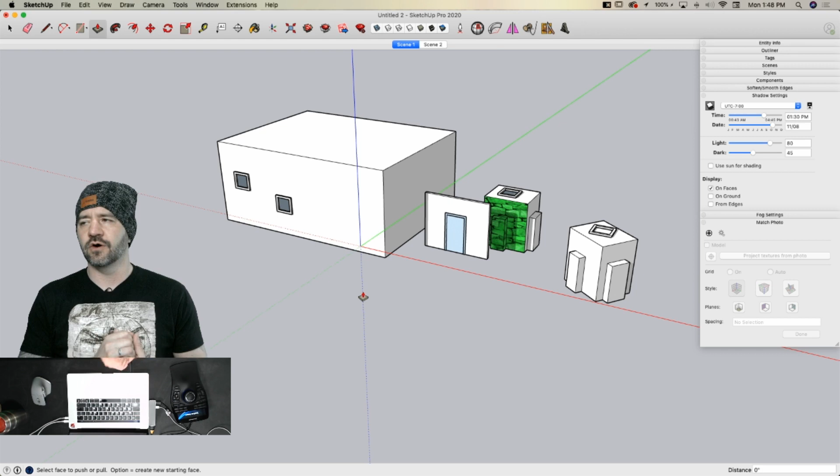They both work great. Most of our customers use Windows, but everybody that works in the office, almost to a person, uses Mac. The nice thing about SketchUp is there are some UI differences between the Windows and Mac versions, but base functionality is the same, so drawing something is the same. Where the UI is, how the toolbars snap, that kind of stuff is different. But really it's up to your personal preference, a lot of times that comes down to what else you're doing with your computer. If all you're doing is straight up using SketchUp, it takes it out of there. But if you're doing something like heavy rendering, or you need to run Revit also, or whatever else, then you may end up on a PC. I don't know, it's really up to you.

Don wanted to know if there's a plugin or other technique to improve the visibility of a long list of scenes. They don't like the double arrow dropdown, they'd like a double row of scenes instead. Not that I've seen, not that I know of. I don't think I've seen any extensions that have to do with scenes. There were a couple extensions that reorganized layers for a while, but I don't think I've ever seen anything that changed the scene UI. It's not to say it's not out there, I just don't know of it off the top of my head.

Well, I need some new questions. Someone just mentioned the 3D mouse again.

When I use select, there's a lot of lag, it lags forever with the select tool. They're using an Acer with 6 gigs of memory, so basically their computer is lagging whenever they do selections.

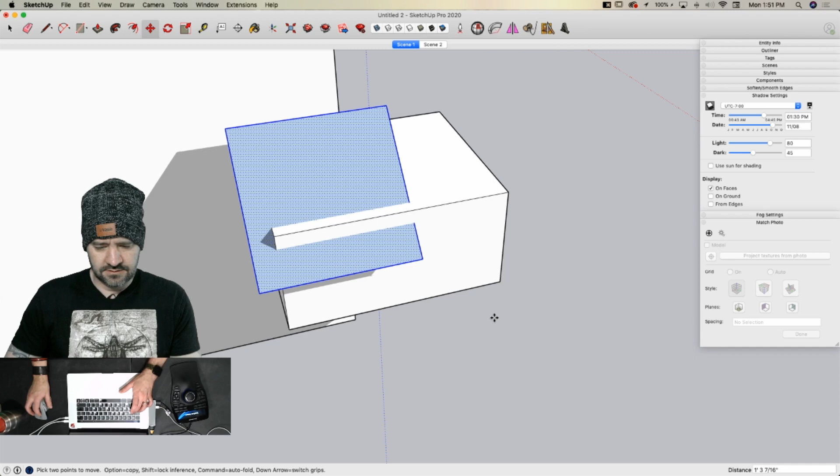So if I wanted to, I'll do this, this will be fun. So if I wanted to just knock this corner off right here,

What I could do is select just the pieces that are affected, like that, and then I could right click and say intersect face with selection. That means only those pieces that are highlighted are going to get cut. So you can see the only spot that got cut then was this corner, which is what I was hoping to cut off, like that.

Let's back up. If I had done the same thing, just this geometry, and I right click and say intersect face with model, that says intersect this with anything else it runs into. So when I do that, now my box broke over here as well as over here. So it intersects with everything.

That'll actually intersect with hidden stuff too, so you might have something turned off and all of a sudden it'll get broken. I rarely ever use intersect with model because there's just too many issues. It can take a long time - if you have a really big model with lots of faces, it's going to go through and check the selected faces for any time they run into any other face in the model. It can be a time-consuming process, it can take too long.

So I always try to make sure that I only intersect with context. So if I'm inside a group, intersect with what else is in the group, or just be careful on my selection and only intersect with selected faces. So that's kind of the general idea there.

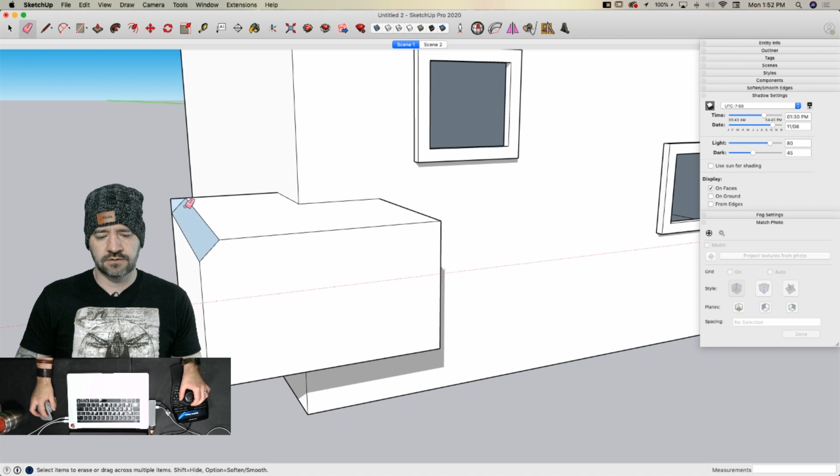What's the best way or trick to solve a local super zoom problem? You know, when you want to zoom very close and the corners disappear. Sounds basically like near clipping.

Yeah, if you're getting into clipping, that means you're too close. So this basically is my camera going into the model. If you need to get closer than this to something, you're probably best off scaling your model up and working on it. If you're dealing with anything that's so small that your head's poking through, a couple things - a lot of times when people see clipping issues, it's because they're doing really tiny work on a model that's really, really big. Once you get a bigger model, then your possibility of getting that clipping plane increases.

So that's where context starts to help. If you have certain pieces in groups and then you're only working on the geometry in that group, you're less likely to hit that problem. It's not there's unfortunately not just a pat answer, here's exactly what to do to get rid of that. It depends on what exactly you're working on, unfortunately.

So Isuru has asked this a couple of times. I don't quite understand the question, but maybe you do. How to model a net-like structure, like on a diamond chair?

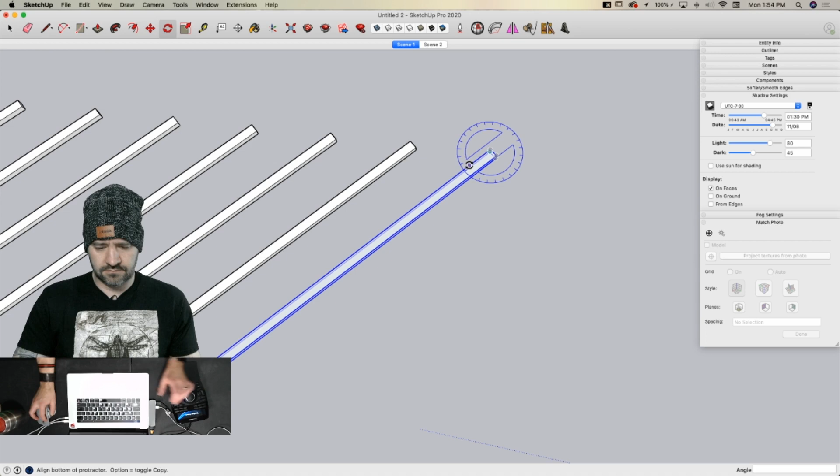Yeah, I guess that would depend on how much detail you really want, because you could do something pretty simple like this. I'll take this and I'll rotate this to 45 degrees, and then I'll offset. I'm gonna grab this one. I'll offset that piece. Like something like that.

Looks net-like. I don't know what a diamond chair is, so I don't either. I'm assuming that would give me a little more context. So if you're just trying to make a faux shape like that, it's pretty easy to just offset materials.

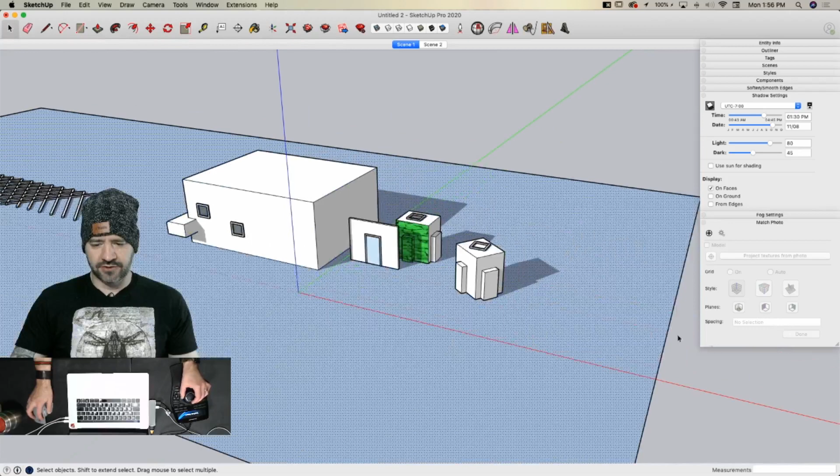Look at this mess. All right, let's say, oh, I forgot to put everything down below the ground. All right, let's say I'm working on this nice neighborhood model, and I want to drop some trees in here. So I'm going to come in and I'm going to go find a 3D tree. All right, here, this looks like it will work for what I'm doing.

All right, so sometimes when I bring models in, they can eventually slow down SketchUp. Every time I move in 3D space, SketchUp has to redraw the model to the screen, and it can be time consuming depending on how much geometry is there. Things like trees, especially where I have so many overlapping planes and geometry, can be especially taxing when it comes to redrawing what's on the screen.

So what you can do is you can actually clean some stuff up real quick, create what's called proxies. So if I look at my components right now, let me clean this up. Like we talked about earlier, I'm going to go to Windows, Model Info. I'm going to go to Statistics, and I'm going to purge to get rid of some of my data here. All right, so now I have this 3D tree, I'm going to come in here and create a super simple proxy.

This is my proxy tree. So I'm going to grab this and say make component. I'm going to call it my tree proxy.

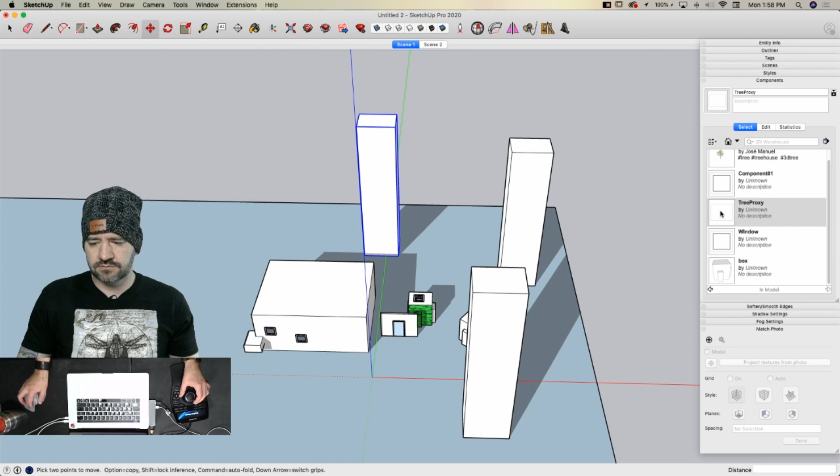Now what I'm going to do is grab this guy, delete it. I can take my tree proxy right now and put this in a whole bunch of times, any place I know a tree is going to go. And as long as I keep working in SketchUp, this is 6 faces, it doesn't slow down SketchUp at all, even with shadows turned on, which I'm going to turn off so I don't lock myself up right here coming up to what I'm about to do.

So this, I used a box for this. This could be a Face Me 2D tree, or just a simple image, something that represents a tree a little bit better than these boxes maybe. But there we go. It could literally just be a single line. So these represent where I want to put them.

Now what I can do is come over here to Components, right-click and say select all instances of my proxy. And now if I come over to my 3D tree, I can right-click and say Replace Selected. So that's going to take my instances of my proxy and replace them with my 3D tree like that.

These aren't horrible, but once you get really heavy stuff, it can start to bog things down. So what can happen is maybe you do most of your modeling like this, and then get your scene set up, your view is perfect, this is just what you want, and right before you go out to render, that's when you come in here and say Replace Selected, save, and send that out for rendering, or export to layout, whatever your next step is. Do that just before you're finished. So just something to think about. Proxies are a great way to save yourself the weight of a super heavy model.

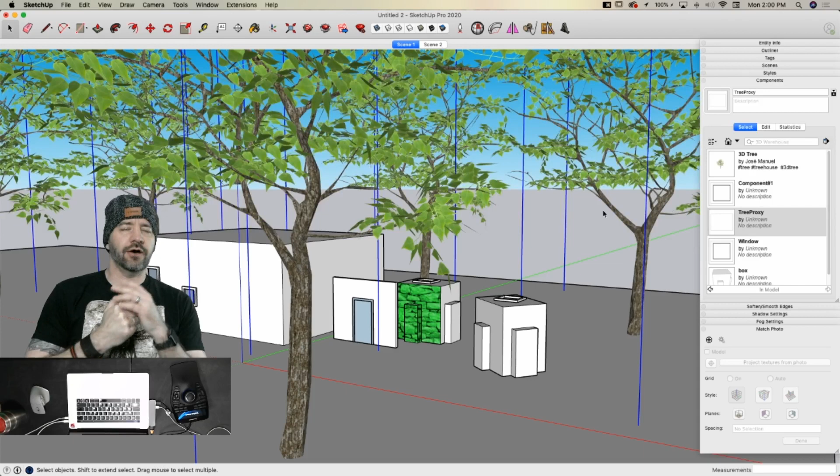It sounds like Wednesday we're gonna take a run at some extensions. I'll come up with my list of top 10 extensions. I will come up with 10 extensions, going to be very different extensions, not all the same type. But bring your questions about extensions because we can go look at more.

Sebastian wants to know when we're going to review the bag-end submissions. Friday, I will do Friday. We're going to do a different model, a bigger model Friday.

Last week I was supposed to model with my tablet and I totally forgot. I'd say it's pretty good that I remembered to show up, because I've been having those days where I'm just at home constantly, so I've been doing this thing like, wait, what's today? So the fact that we did a live model should probably be a success. But this week for sure we will do a live model, and it will be with the tablet and not my Logitech mouse. So it'll be good, it'll be fun. But that will happen.

First thing we'll do when we come back on Friday is look at the renders and bag-end. So if you haven't already, go hop on that other forum topic, download the bag-end model we created. Fire up Skatter, get your best tree, grass, bushes, put them on there, and we'll take a look at them when we come back.